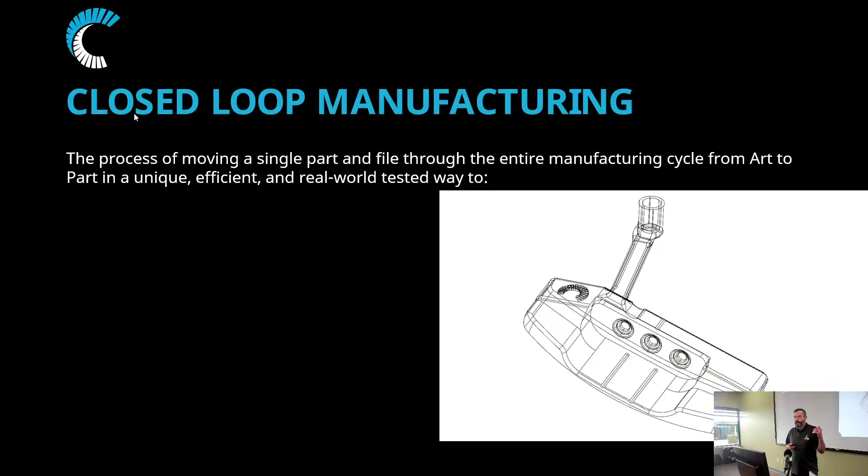If you guys were here last year, we introduced this new project, and it's actually on the table over here. We wanted to take a look at all the products we represent and take a single part file and move it through art to part, right? The whole design to manufacturing phase. So we picked a putter head.

We had an older putter. We reverse engineered it with VeriSurf. We scanned it in. Then we actually 3D printed the head of the putter in stainless with desktop metal. And it's such a unique shape that, instead of kind of creating your own work holding on a CNC machine, we decided to print it in, I believe it was carbon PEEK.

That frees up a CNC machine. That material has just about the same tensile strength as aluminum. It's holding the part well. It's not marring it. It allowed us to do all our operations and finish that part. They were minimal, with some engraving. We milled the face of the putter and we kind of cleaned up the bottom. But it just kind of shows, it gives you an idea of how 3D printing and additive can kind of help your shops.

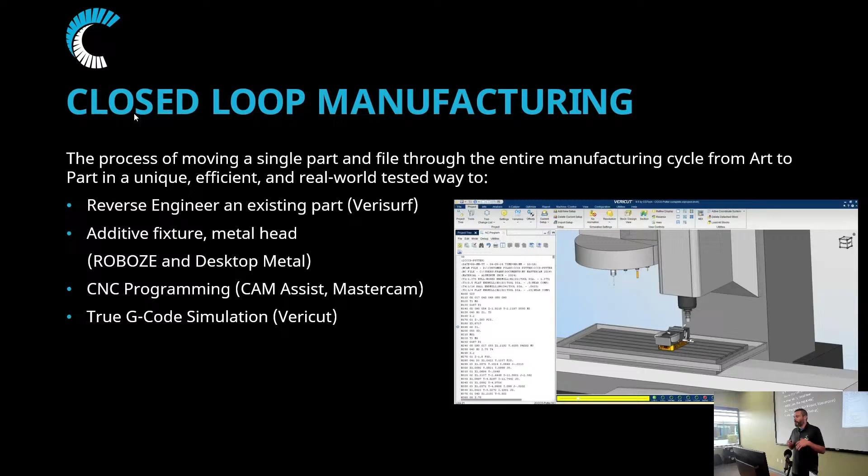So for the programming, we can rough the part out with CAM Assist, finish the programming with Mastercam. Then we want to make sure it runs correctly on the machine with simulation. That's where Vericut comes in. Before, during, and after the machining, we have probing routines to make sure that the part's located. We're inspecting it during and after. And then, of course, we're going to scan it in with VeriSurf and make sure that it's exactly what we wanted.

So the final thing, which is my favorite, is you got to take it out on the golf course, see how it does. Did not make me a better golfer. Not much does. I'm terrible. So we used it. It worked out. I loved it. I still stink at golf.

Moving on to WESTEC that's coming up. They moved this from Long Beach to Anaheim this year, and they moved it a month earlier. So it's October 7, 8, 9. This is my pitch to everyone to go to the show. We have a big booth right up front, number 1201.

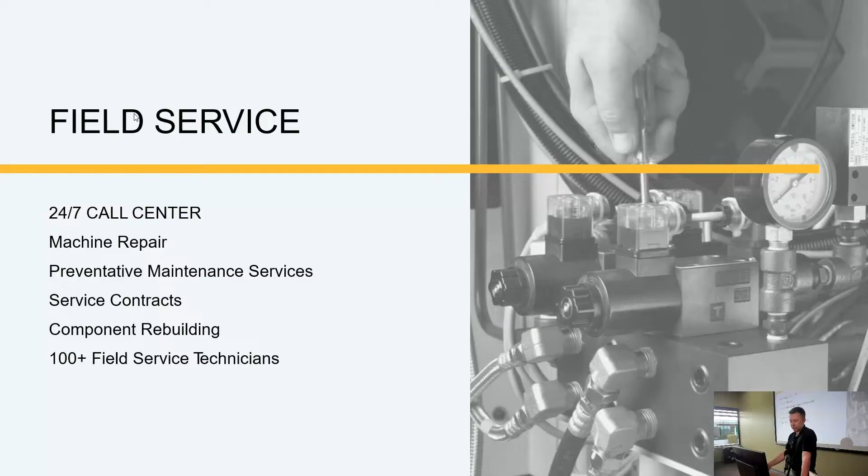We do process engineering, turnkeys, and contract engineering, so if you guys need help programming or with your process development, we do that as well. We have a very strong service group available with a 24/7 call center for technical support. We also offer equipment financing.

So again, 100-year-old company, we've got a large operating footprint, we've been around a long time and we'll be here for a long time. We've got strong relationships with the brands we represent in all facets of supporting the equipment. You're welcome to follow us on social media.

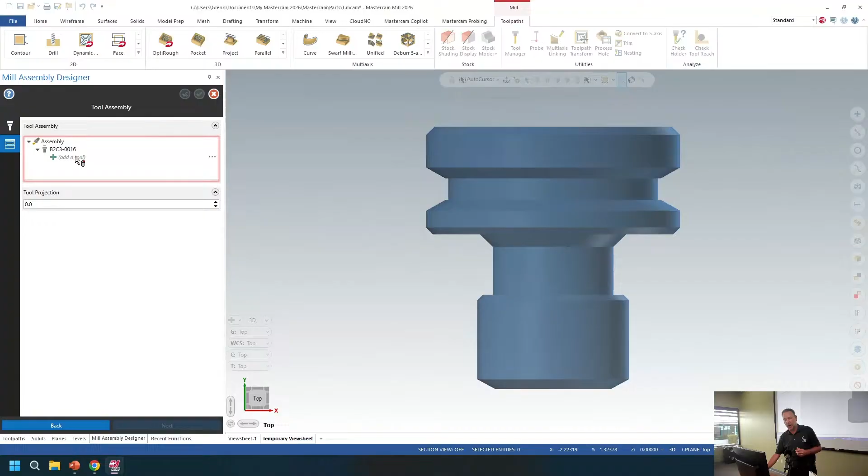Now, when you add a tool, I'll just grab one of mine. Okay, whoops, wrong size tool, don't do that. Good news is I can delete and add a new one. Let's see.

Close enough. Okay, the good news is that within this assembly, I still have full control over tool edits, holder edits. A lot of people think that once I have this assembly built, it's done. I have to do a new one if I want to make edits, and that is absolutely not the case.

In this tool assembly tree, I can right-click and edit just the tool individually. So what they've changed and made better, kind of like the machine group properties, is you can work with the different tree style buttons here.

Tool number, what type of tool, of course all your logistic stuff, cutting diameter, flute length, tip treatment, which again is basically what type of tool it is, and of course your speeds and feeds, all the other savable items, coolant, etc.

You can use your next button to toggle through these items. Hit OK, hit OK. I have this all set and ready to go.

Once you have taken those, and just to kind of speed the process up, I'll add a couple that I have previously messed with here.

Then if you'd like to save these items to a library, it's no different than it's always been. I can right-click and just save them to library and you're done.

Okay, so I really like this because, again, with less mouse clicks, number one, in the classroom, I have to teach you less things. Okay, we get through the day faster.

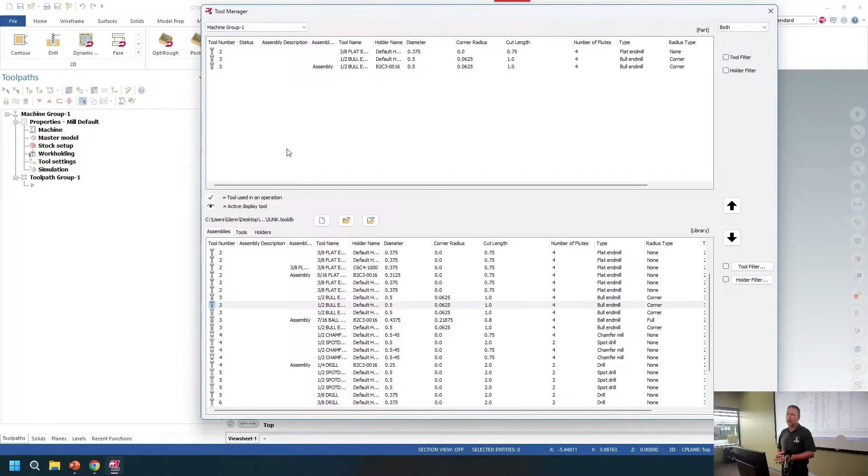But I also have the root menus that I've always had. If you're used to using the tool managers, great, because this is still the same old manager it's always been, but with user-friendly items inside of it to kind of help work things along and get your assemblies saved.

And don't forget, guys, if you have assemblies and tool libraries from older versions, they're very easily updatable. That's one of the things that I think a lot of people don't realize, is that a few mouse clicks and your assemblies are moved into the new software.

So you don't have to start over. If you ever have questions on how to do that, you can reach out to myself or one of the other tech support staff. We can get that done for you.

Lastly, and this is a quick one, but you may have noticed in Mastercam 2026, this little guy right here. And I cannot tell you, one of those things when we at CAD-CAM first got the preview versions of Mastercam, we looked at that and went, okay, it's the same thing, just not down here anymore.

Use the hell out of this, gang. This is one of those things to where basically anything having to do with planes, 2D, 3D, is right here in front of you. And I got to tell you, especially as I'm getting older, now I'm using reader glasses, which I hate to admit, having something right in my face is a nice thing to have.

Okay, so you can access your planes right through here. You can change your graphics view, your coordinate system, construction tool planes. You can even switch between 2 and 3D.

And the other thing that's cool is you can even create a plane from right here too. You don't even have to dive into the manager to do any of that. So that's one of those things, again, just kind of a small, minute change, but it's less mouse clicks and it's right in your face.

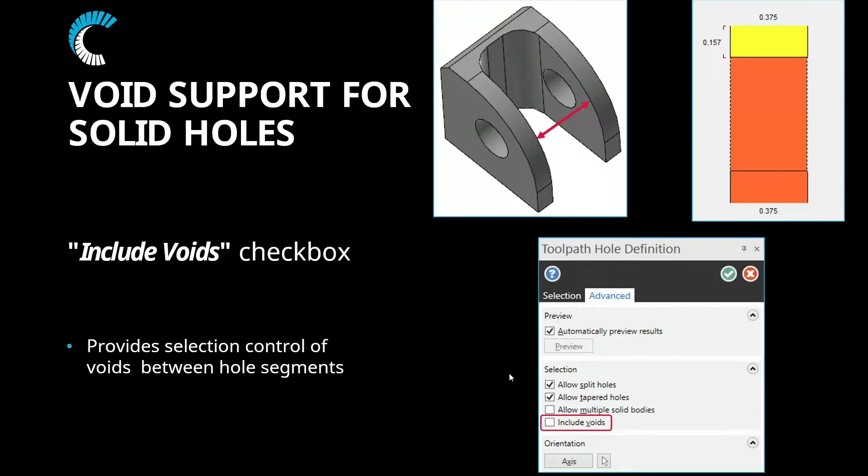So I'm going to show that here, and then I will also in the same file show this priority safety motion, which is cool. So let me go over to Mastercam here and see if I can find my files.

Let's see here. I need Sean's reading glasses. I guess we're all getting old, huh? This one.

All right, so like I mentioned, in Mastercam 2025 and previous versions, whenever you had a hole like this on the same plane, then you would get one toolpath and you wouldn't have the ability to chamfer both sides. So I'll show that here a little bit, and let me move the prompt out of the way here, hide that.

So I have, this is your selection, your geometry selection or your solid hole selection in Mastercam. Everybody should be familiar with that. In the advanced tab now, under the 5-axis drilling, I'll show that too, you have this include void option. So that is unchecked. This is basically how Mastercam used to be. So I'm going to show you.

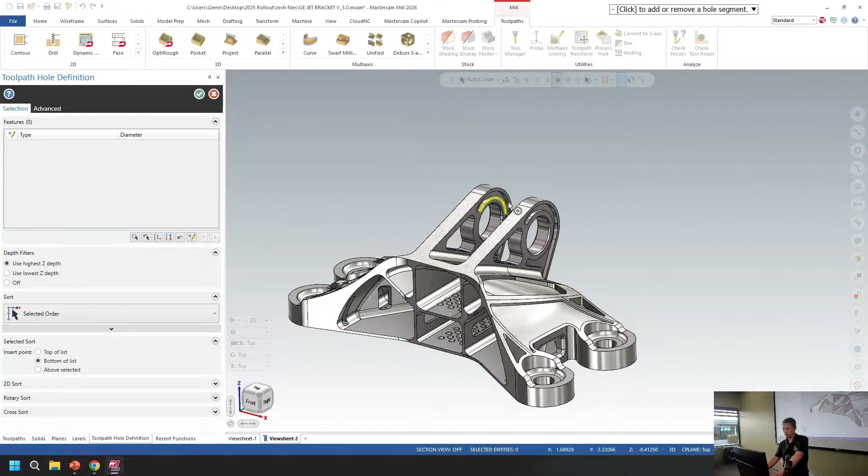And you would come in and select, for instance, let me delete this here and go in and select here. So you can see it's automatically grabbing this other hole and reading it. So if I click over here, I cannot get a separate arrow on the solid hole. I'm limited. I would have to create another toolpath to spot drill that, to chamfer that, etc.

So now in Mastercam 2026, this is off by default, the include voids. So when I come over to selection, now when I click on the solid hole, I can also select the other one over here, make sure my arrows are going in the correct direction, green check, and I'm going to jump into the parameters here, guys.

So you need to be on 5-axis output for your tool axis control, and set the other parameters, a safety zone, all that good stuff. We'll take a look here just for time's sake. I'm going to green check. And you can see now we can do it in one toolpath, whereas before this would have had to be two separate toolpaths, okay?

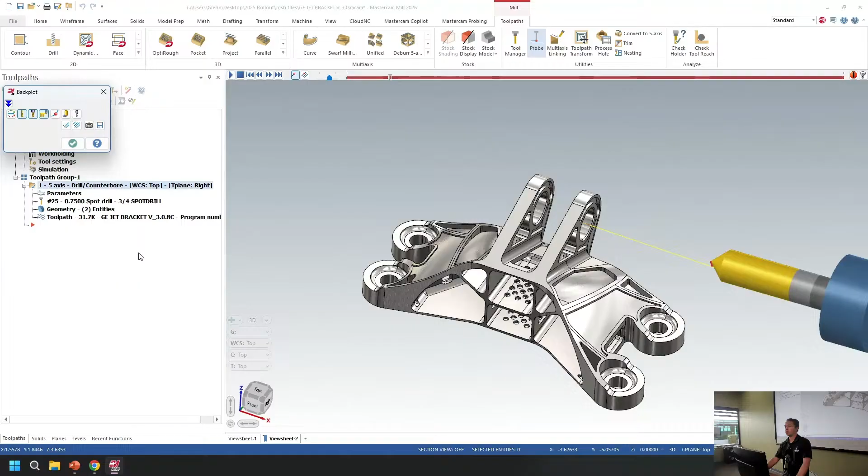So just a nice little enhancement there in Mastercam. Hopefully it makes your life easier, right? That's the goal. One little step at a time over a lot of toolpaths, a lot of years. It's big improvements, right? So that's one really cool thing. Again, that's off by default, okay?

So that is in the geometry selection under the advanced tab. If you're used to the way 25 worked and you need that hole to go all the way through, then you can go back to that. But now you have this option, which is really cool and helpful for operations like this. All right, and then I'm also going to show in the same file here, under safety zone.

So again, we're still in 5-axis mode for output. Under our safety zone here, they added a priority motion option for your retract length. So you have 3 new options now.

You have minimized length, which is shortest distance. Then you have minimize angle, which is basically try and get it in the least amount of motion on the axes, on the rotaries, that you can minimize.

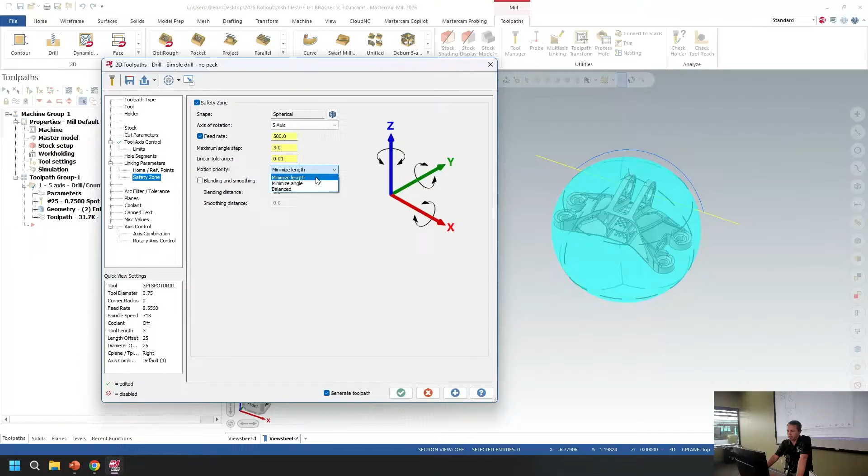So I'm going to show this here. If I do minimize length, you'll see here that I'm going to get motion like this. So I'm going to green check here. And I have basically the shortest distance, if you would.

If I go in and select minimize angle, it gives me the shortest, least amount of rotary motion needed. It's trying to limit that and be direct. You also have balanced, which tries to do a combination of both, so you can select one or the other, and balanced tries to balance both as best it can.

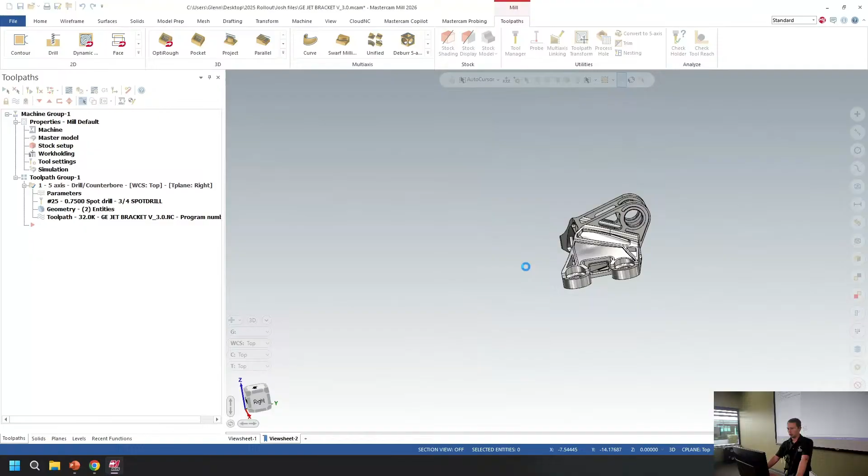In this case we can try it, I think it's not going to do much besides one of them. Yeah, so it's just picking the minimum angle, I believe.

Minimize angle, yeah. So if you have a motion you're trying to go around on your clearance for multi-axis, like drilling or different things, it could be helpful if you don't want your rotaries spinning around a lot. Maybe you have the option to minimize angle or minimize distance. Think of it like an aircraft flying around - if you fly to Asia, you fly over Alaska, shortest distance kind of thing. It's that same concept.

I know this part kind of shows it with the sphere nicely, I believe. It's not overly complex. You can see, like I mentioned, I'd like to think of it like a plane flight - you're flying across the globe, shortest distance, etc. Minimize angle, minimize length, right? So those are some neat new enhancements.

I'm going to jump back into the PowerPoint here, and they also included a new thing: critical depths in OptiRough. Let me jump into Mastercam to show this. Let me pull up a file here. See how fast this computer is, huh? Yeah, we're going to metric units. Cool.

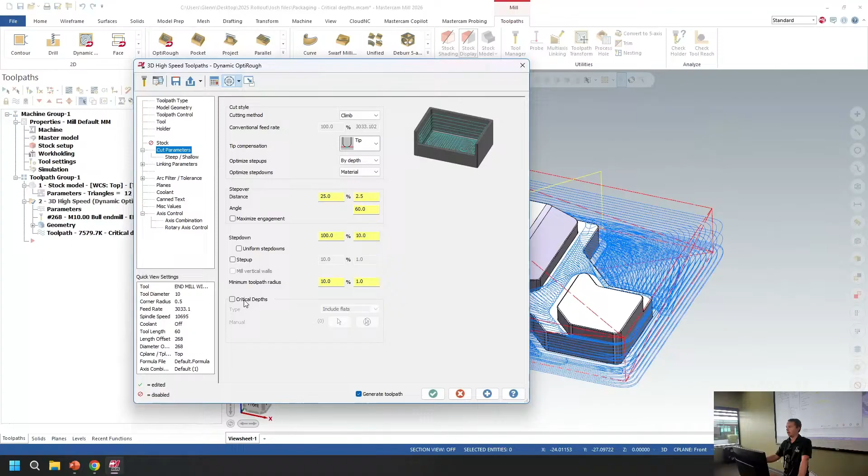In OptiRough, under our cut parameters, we have a new critical depths option in Mastercam 2026. Keep in mind this is for step downs - we still have the ability to do step ups, nothing has changed, we've added functionality. Mastercam's added functionality, which is cool. In a case like this, you have a feature with flats here, and you could use step ups, that'd be one way of doing it. But if you're stepping down like this, maybe you want it to grab some of these floors.

And get some critical depths. So you can do it two ways now. The critical depths here - you can include flats, so it'll automatically detect them and pick them up, which is really cool. Or you can select them manually, so if you really want to force a depth cut to this level, it's really cool. Now you can force it to that depth and it'll go around and machine everything at that depth, which again, maybe you only need it for certain applications, but it's more power, more functionality, and makes you a better programmer in that instance that you need it.

So if I hit include flats right here, I'm going to show you what it does. You could see when I tipped it to the front view, it wasn't getting the bottom floors, and we'll regenerate this here. This could be helpful too if you're close, say cutting 100% of your tool diameter, 150% of your tool diameter, and you're really close to that floor - maybe you want to grab that critical depth, or maybe it's a little bit above or something. It's just really helpful to grab it with the critical depths.

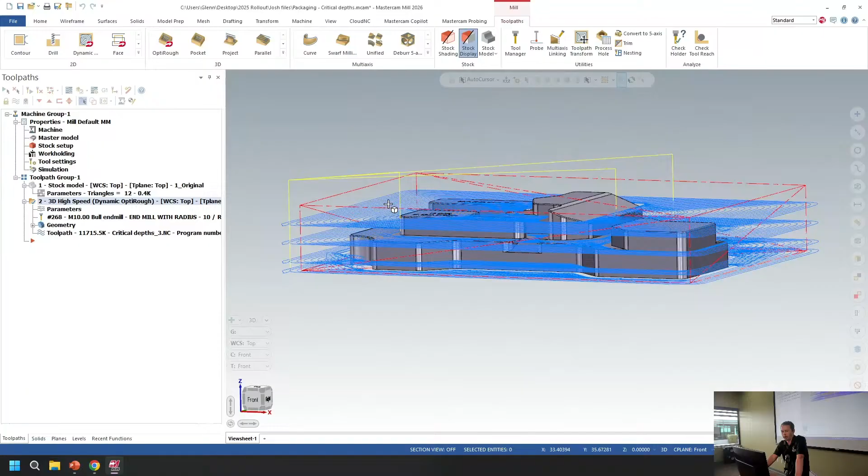And the last thing I'm going to show here is in Contour. Let me go to - I'm in the wrong plane, hang on one second. I'm in the wrong, let me flip this to top here. Isometric. So I go back to Contour here.

I'm going to grab a feature here just to show this. You're probably familiar with it from other toolpaths - you have dynamic motion with color selection for chaining geometry. They just added this in the Contour toolpath, and I believe a few others as well. It was already in the dynamic toolpaths, and I believe Peel Mill and those too. So they just added it in Contour - it's a nice little addition.

It's helpful because now you can see, okay, my chained geometry is green. You can change these colors if the color is hard for you to see. But it's just easier to see now - green chain, avoidance model, etc. In Contour it's pretty straightforward since we're not doing a lot of avoidance stuff, but in dynamic, I'm sure you've all used it and it's been pretty helpful. Just a nice little additional enhancement there.

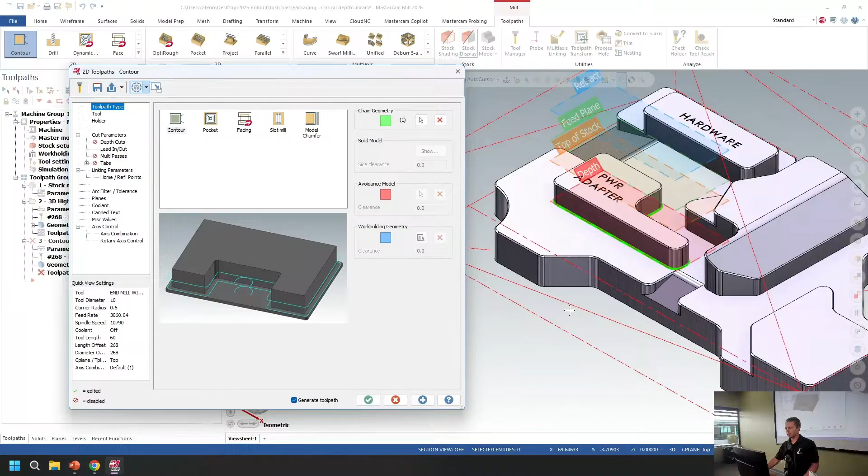All right, oops, got the wrong thing. Did I go back to PowerPoint? There we go.

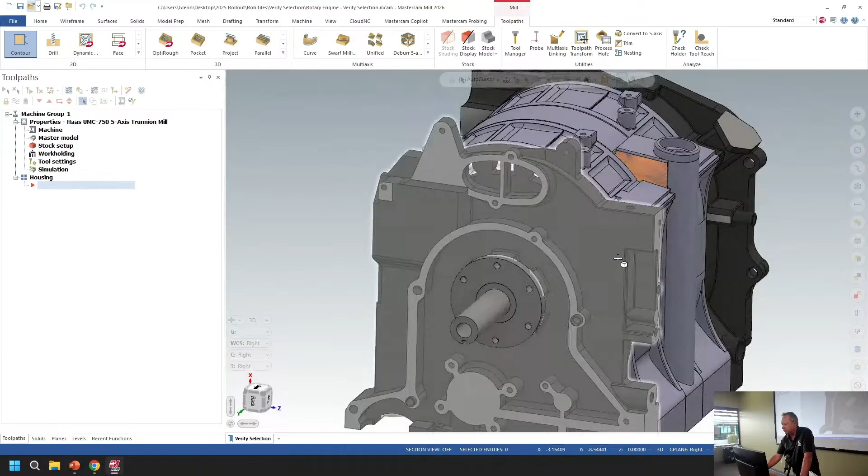This one is just a nice, clean enhancement that helps you guys with some really busy models. As you know, trying to select something that is deep down and buried inside of a model - you start clicking your mouse all over, hoping you can click on it, and you don't even know what level things are on. So let me show you this nice clean one.

Notice when I hover my mouse over the part, it'll give me a number - like there's one of 7 features. So what I can do now is not move my mouse, let that hit, and when I right click, I can see, if I'm going to grab this surface here, and hide it, I can grab that surface. So that's another thing that'll make your life a little easier. Depending on the view you're in, it'll find that number, and it's just a right click to bring up what level it's on, so you can easily select that and move on your way.

So let's go back. Let's go back in the PowerPoint. Yeah, so the tapered helix.

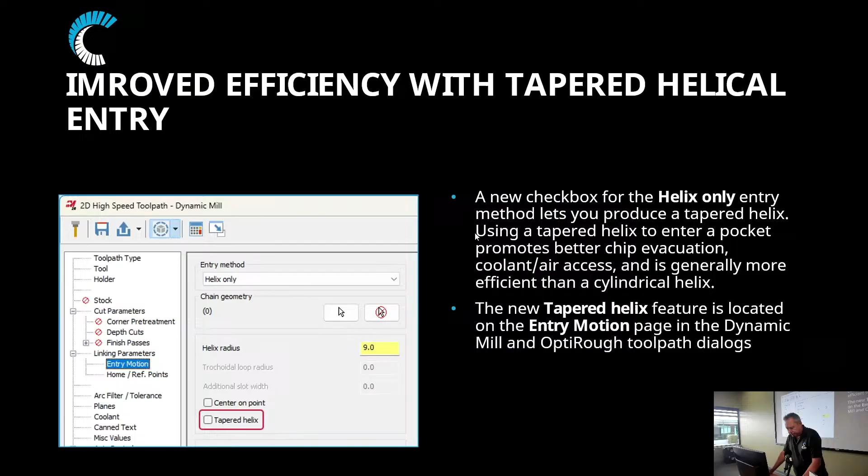You might look at something like this and say, well that's cool, but it's kind of just a switch, right? Why do we have this switch? Well, let's go back to when we started with dynamic milling - it was all thought about based on the tool, giving you guys control of the cutting tool with the step overs and the whole motion. I'm assuming all of you are now using dynamic. So with that in mind, we decided we need to control the tool actually getting into the material, and how those chips are going to come out. Something as simple as throwing a switch with tapered helix is going to be a huge advancement for you guys.

Let's see, tapered helix - let's just grab a part, switching back. Okay, so let's take a look at this entry, and we'll run it in Verify. So this is the standard, typical - let's do some clipping. Oops.

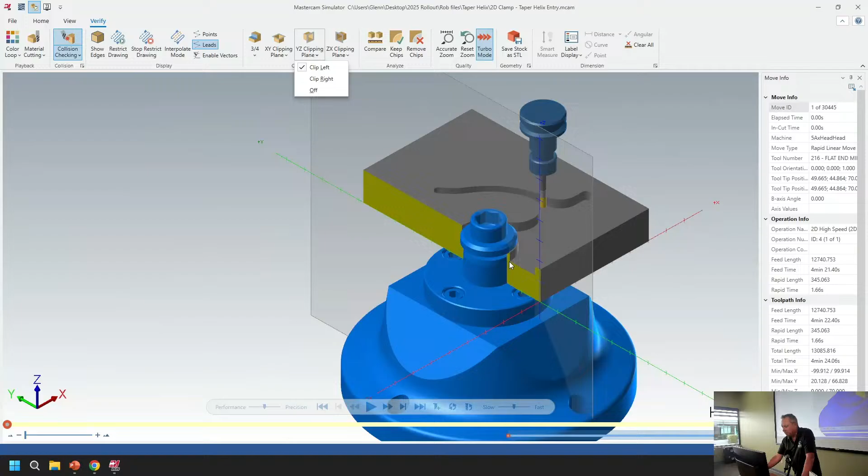No, hold on. I got my clipping off. There we go. So let's just kind of clip this and step it through. So this is what you guys are used to using. Obviously, the tool will come in as a helix motion. And if we kind of bring this in here, you can see once that tool gets down to full depth, then it's going to start cutting. And as we're doing this, we're just pushing these chips around inside that hole. There's nothing to get those chips out of the hole, unless you're on a horizontal, right?

So just a nice little switch here, come into the toolpath, and in the entry, just turn on tapered helix, and that's all I have to do, okay? So what it'll do is take that motion, you can kind of see it right there, it takes 95% of the tool diameter for the top part of the helix down to 25% of the tool diameter at the bottom part of the helix, okay?

Now keep that in mind too, we're going to tighten up that helix going down. So you might need to slow your feed rates just in case, right? Because it's going to start moving that machine. But let's take a look at the verification on this. You can see just this quick little enhancement. Again, you don't have to do anything but turn it on.

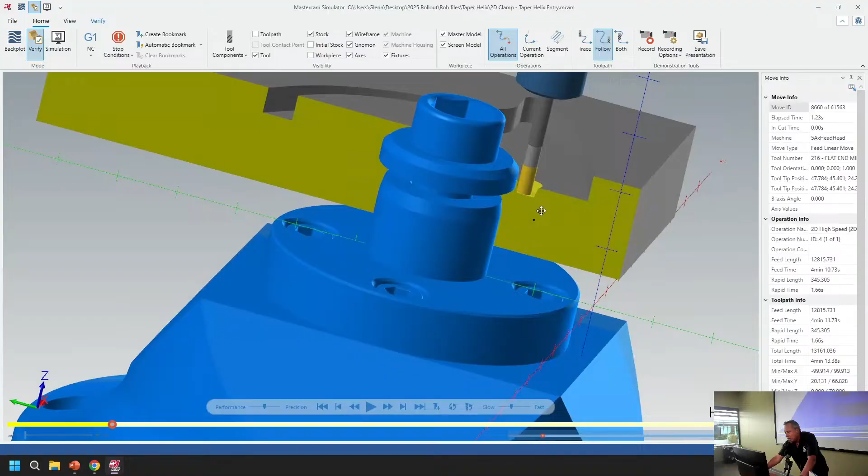Let's get it down in there. And let's pause that and grab this. All right. So you can see now as it tapers down and as the tool starts to actually cut that material, and here we go. Each depth cut, as it starts going, you can see it cuts here, gives a chance for the chips to get out. Make another cut, more release of the chips. And again, respecting the tool, just considering the life of the tool is really what this is doing.

So, and again, just something simple. This is why we have these enhancements, because you guys have been requesting them.

3D deburr. How many are you deburring your parts using Mastercam? Okay, just a handful. Take a look at the 3D deburr. You know, every part has to be deburred, and it's probably one of the most unsafe toolpaths or processes that you have to do for the finished part. You're literally scraping material away, and you know the problems. So we introduced 3D deburr in 25, and we also introduced the ability to use tapered tools.

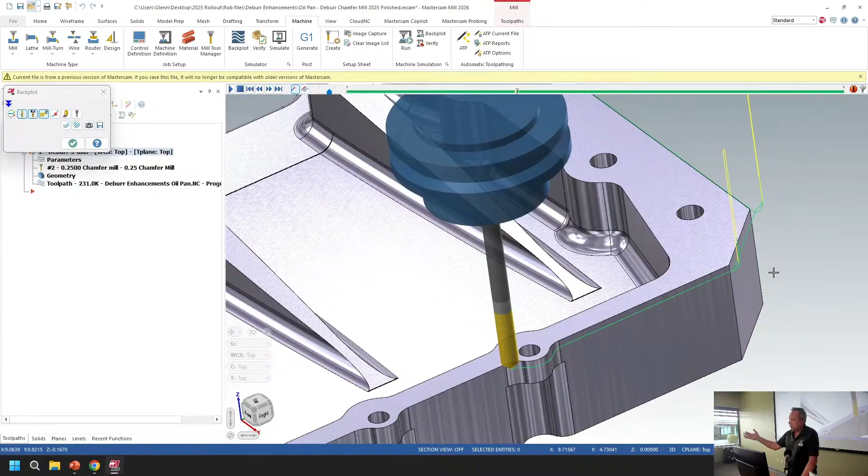So again, we allowed for chamfer tools, and this is a 25 file, and we'll just kind of get right in here. You can see as this transitions from this sharp corner to this sharp corner, it's pulling up and coming back in. Now at the end of the day, all of that's going to deburr, so it's not missing anything. It's just that irritating retract move.

And in 26, all you got to do is regenerate. So in 26, when you're actually doing the toolpath, it'll just be natural. But if you're bringing in a legacy file, then all I have to do now, and you just saw, is just regenerate the toolpath, and the tool stays down. It acknowledges those corners, okay? So it's an enhancement you don't have to do anything with, right? Just do it. All right.

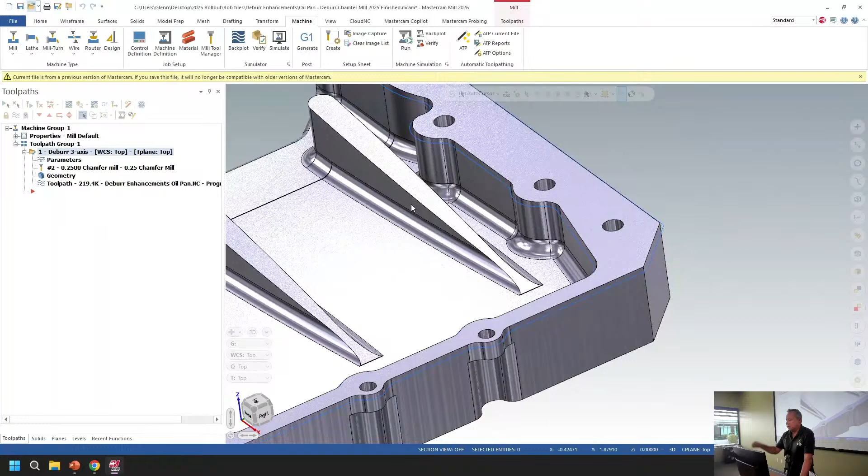One other feature that we added with deburring was with undercuts, with lollipop cutters. In some cases, it didn't cut all of the holes in the undercuts with the lollipops. It got a little busy when the undercuts got past like 45 degrees, it just kind of kept pulling up inside this hole, and it just didn't lay down, right?

And again, you had to do a lot of trickery to get that to work, and there were a lot of ways you could get around it, but we just put in this switch to allow asymmetric edge shape. That's all it is, just a switch. Now it's off by default, okay? And the reason for that is you have legacy files. We want to read those legacy files in, and then you can come back in and throw the switch, regen, you're done. Save it as a 26 file. But just keep in mind, it is off by default.

And all I do is turn it on, and then it respects. We'll have to regenerate here. Okay, so it will again respect that whole undercut and cut those edges.

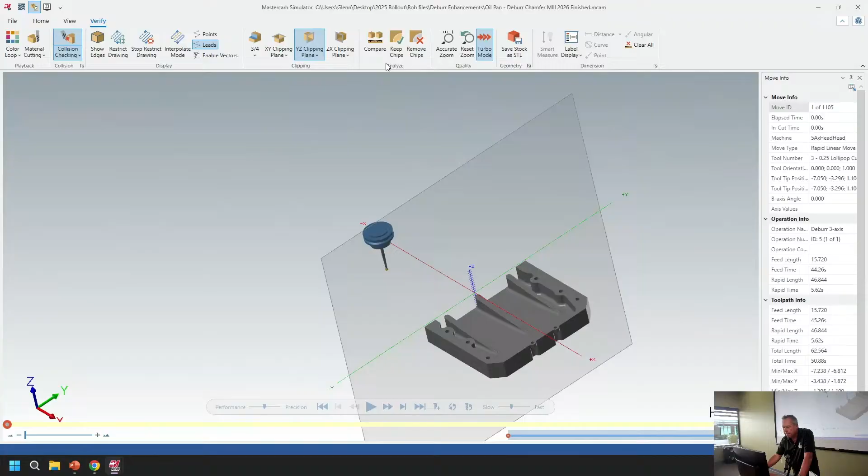So we get it, this guy in here. And let's, you know what, let's go in here. And you can kind of see through it. So you can see that this is kind of where the issue was, in that cross section right in there. And just by throwing that switch, it takes care of it. Again, keeps the tool down and gives you a nice cleaner path.

How are you driving that? Is it surface or edge? You're grabbing the edges. So in the 3D deburr, just grab the whole part. Your machining geometry is the whole part, because you want a gouge check against that.

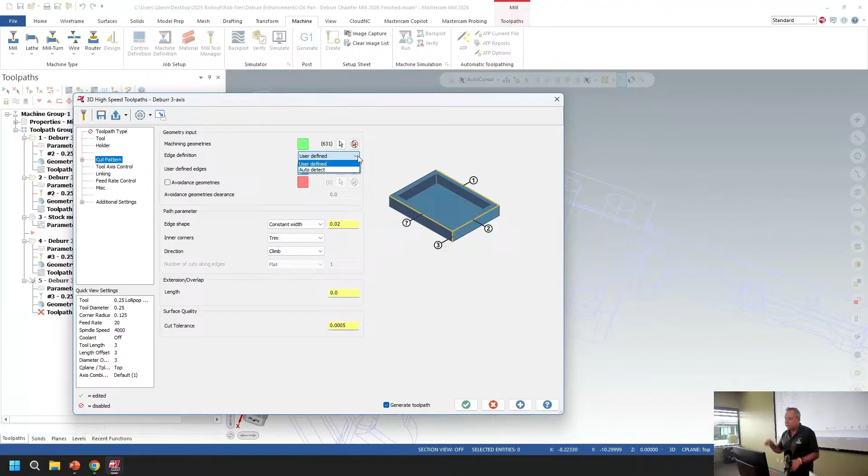Then you have the option of, if I grab the whole part, I could do the auto detect and it would look for every sharp edge. May not want to do that, not in this case. So with the user defined, I can come in here and just pick, and it's just picking those edges, as you can see right there. Right? And that's all I do. Just pick the edges that I want to work with and throw on the asymmetric.

And again, you may want to turn it off in some scenarios too, right? So again, off by default. Very simple toolpath to use, very safe toolpath. Complete gouge checking. And strongly encourage, because again, got to deburr your parts.

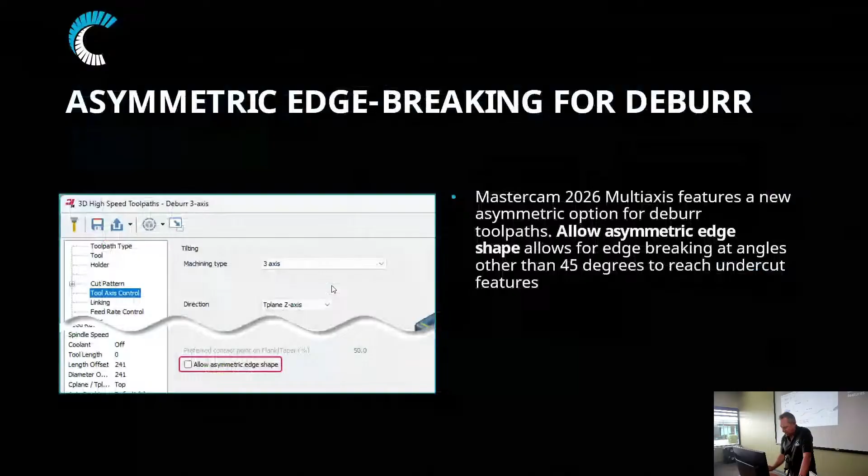All right, so last on the list here. Like I said, we added to the mill turn product the wireframe toolpaths. Does anybody even know what the wireframe toolpaths are? And Jay, I already know you know. Okay, and Derek back there. It's funny, this was before we could cut any kind of surface in Mastercam. So I'm just talking about 2026. I'm taking you to 1990 now.

Okay, we're going back in time, because those are how we cut 3D shapes. Same principle as creating surfaces. As a matter of fact, these toolpaths came out before we could even create a surface in Mastercam. And here we are. Version 3, yeah, version 3, version 4 for sure.

And again, this is going to be in the mill turn product. So we'll open up mill turn. Then I know I have a few mill turn customers in here. So if you'd like to go back 35 years, almost 40 years in time, here we go.

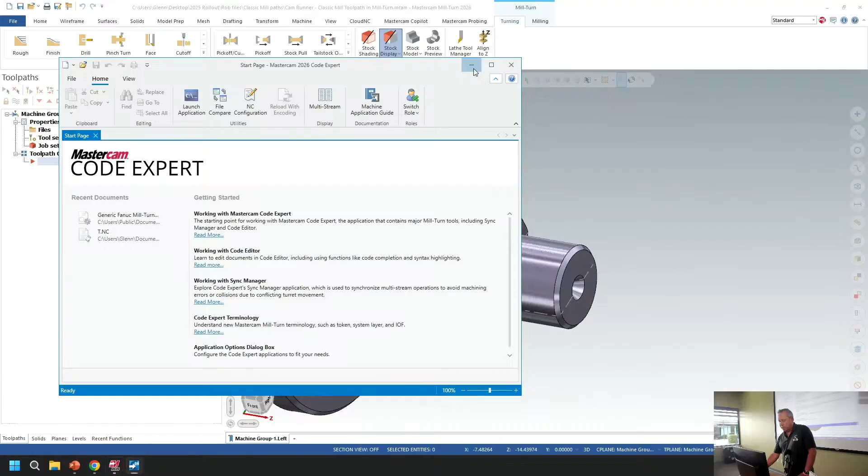So milling toolpath, here they are. You got your wireframe toolpaths now. Again, they picked the old guy, but they forgot that I got a bad memory. So let me see if I can remember my way through this.

Swept 3D. Again, it's going to ask me how many contours I have. I have one. I'm going to take this guy, and I'm going to sweep it along that guy. And here's our tool, the old parameter page, again, kind of trying to trigger the memory here.

The setup, any of you mill turn people, you're familiar with this. So you got to set up your setup here, but then you're probably not obviously familiar with this page. And this is where you literally tell it, you know, this is my step over, this is my across. We'll make this pretty, I can zigzag one way or do circular, stock to leave.

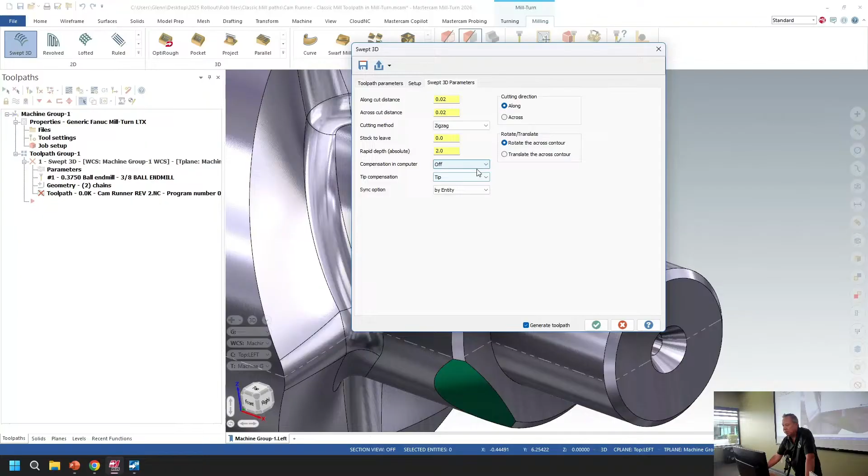You know, I'm thinking 2 inches. I'm not going to cutter comp this. And I think we got it, let's see if we got it. So we're going to take this tool and we're literally going to just follow that contour across. And let's...

See how it works here. I'm going to take it into the mill turn simulation, and this ended up, actually I was laughing about it, but this ended up to be one of my favorite enhancements. It's just simple code. Okay.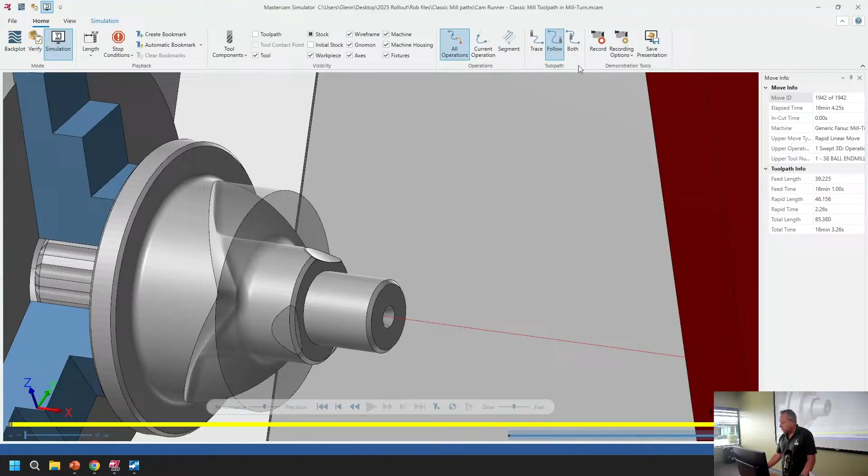Alrighty, I think that's it for me. You have one question on the stream. Oh, I have a question.

The question is about deburring the outer edge, and someone was asking if you can still use chamfer operations for that, like the contour chamfer. We didn't take anything away from you. The deburr toolpath is just another toolpath in your arsenal to deburr a part. But if you're looking at the outer edge with contour, you still have that control. We could still go in here and switch this to 2D chamfer. The downside is that you don't have the gouge checking that you'd have with the solid modeling and 3D deburr toolpath.

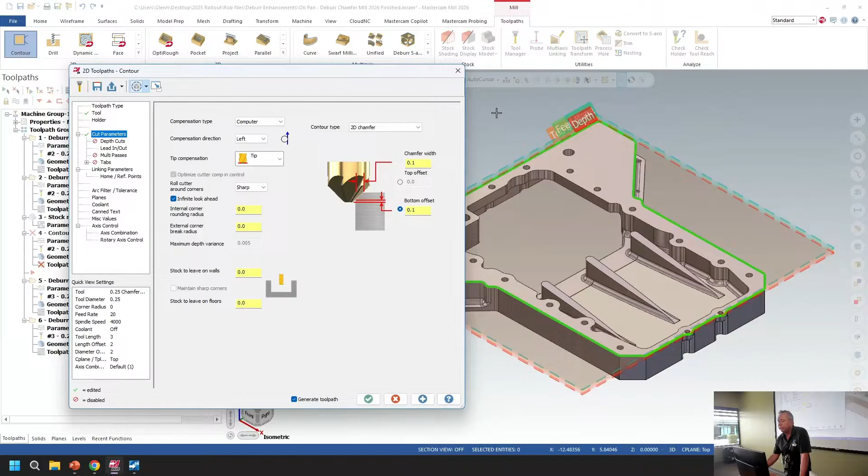Let's take this further. If you already have multi-axis, then you have the deburr toolpath in multi-axis, and you also get the 3D one without needing to purchase 3D separately. The advantage is it's less code. The multi-axis toolpath is vector-based code, while the 3D deburr toolpath will be less code, with smoother arcs and lines. It also works with mill level customers—you don't have to have mill 3D. And let's not forget our router people, they have it as well. So that toolpath lives in here, called deburr 3-axis.

I hope that answered the question. I think we went the right direction with that. Any other questions online? Well then, let me get out of here before I make a big fool of myself. Or bigger fool. Okay, awesome. Frank.

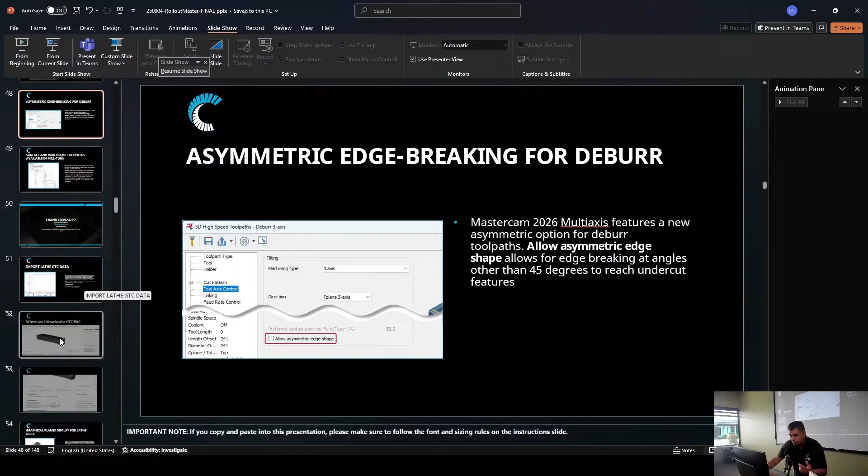There were a few things missing here. I don't know why they're down here, but I did want to show this. So where can you download a GTC file? Like the file I'm using, I downloaded it from Sandvik. I know there are a few other websites like Tools United, Kennametal. This is the specific tool I'll be showing.

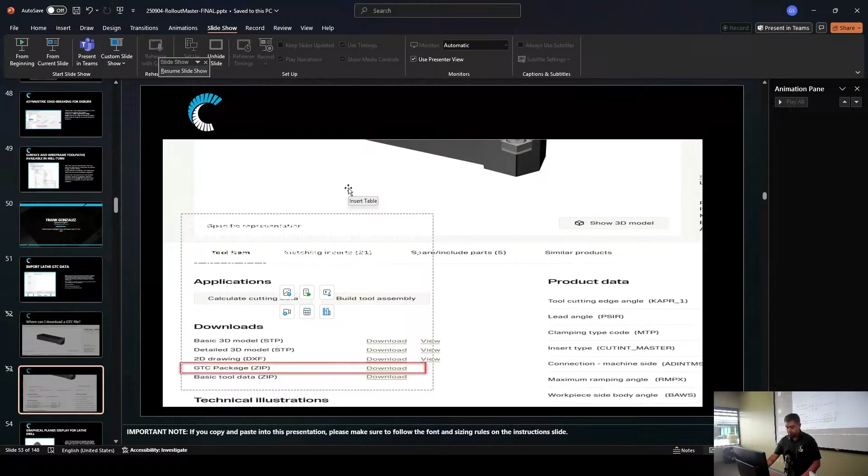It doesn't show it for whatever reason—it's not showing a diagram, I think it's like that. But anyways, you can see here, when you scroll down, once you select your tool, you have the option to download a DXF or STEP file. You'll see this option on the vendor's website for the GTC package, okay. Let me get out of this.

Now to show you how that works, let me open up a file here. Okay, so I'm in lathe—again this would work whether being in lathe or mill turn. So to import a tool, you'll come into your lathe tool manager here.

You're going to right-click in this white field up at the top, scroll down to the bottom where it says Import Export Tools, then Import Tool Data From, and now you'll see this option for the GTC, Generic Tool Catalog. We're going to click on this. This will open up a window, and now I'm going to open and go into the files that I downloaded—I downloaded a couple. Let me see.

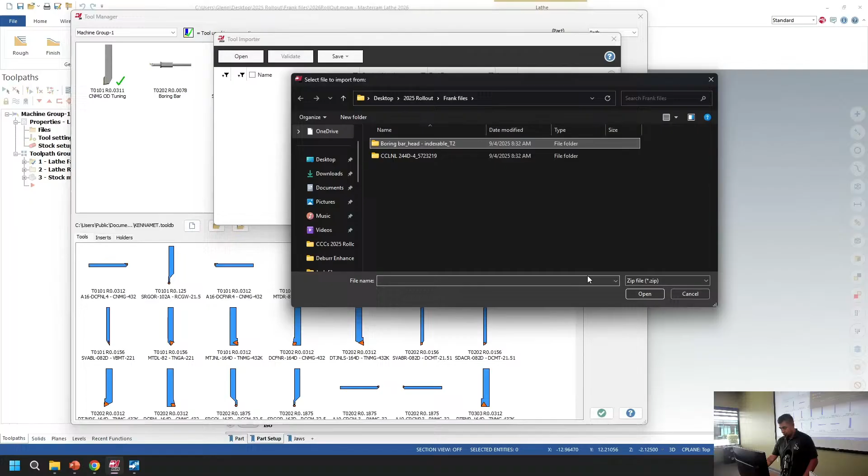It looked like that worked. Looked like it unzipped it. Where's John? We need some tech support. Alright, so that's a zip file. Yeah, but I don't know if it'll work if it got unzipped and then zipped back up. So it needed to be zipped? It needed to be, oh, zipped. Okay, I think I have a copy. Alright, hang on one sec.

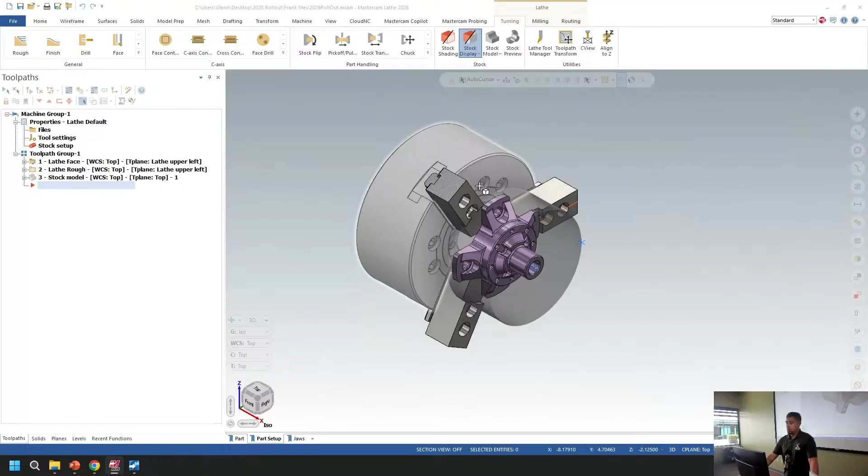Okay, let me give it one more try, see if that works. So import, export, import tool data, generic tool, and then if I click on open and I select this... it's thinking, there we go. Okay, so this window will open up.

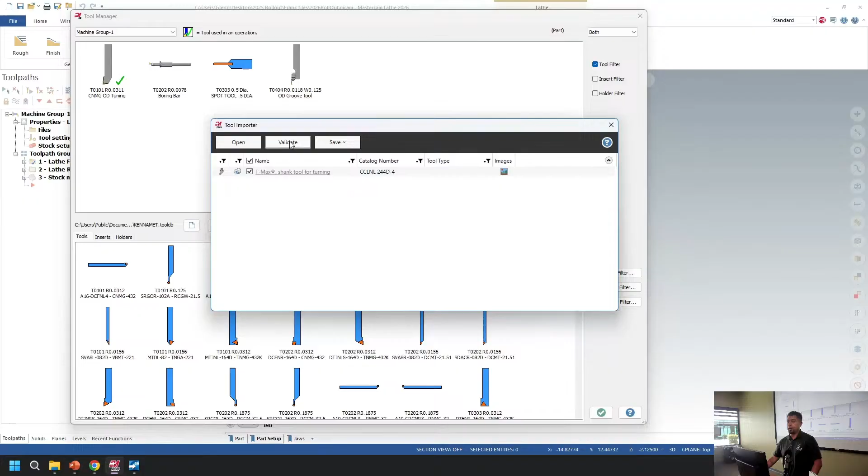Okay, so now to do the whole process, I was gonna use this tool. You go ahead and select it. The next thing would be you validate it. So validating is just Mastercam doing the work in the background of what you would normally do, like selecting your holder, your insert, defining the quadrant where it's gonna be cutting, etc. And then you'll see a green check mark here. That means it's ready to go.

So once it's ready to go, you have the option here to save, and you could either save it to your existing part file, which is where we're at, or you could save it to a library. So I'm gonna select part file, and you'll see it updates up in the back. I was playing around with this, and you'll notice that the image it's showing is because I have something in the background. If I was starting with a new file and there's nothing back there, all you would see is the actual tool itself.

But now if I come in here and double click, you'll see the tool properly defined, and you might have to go in there and change certain things, but all the tool data that came from the website is all integrated in here. So again, this takes the fun out of design, like picking your holder, insert, everything—it just does it in a few clicks.

Any questions on that? So you have to have it unzipped. Yeah, it has to be unzipped. And normally, I'm sorry, zipped. It'll come zipped. Yeah, it has to be zipped. So directly, exactly how you extract it from the tool vendor's website, that's how you take it in.

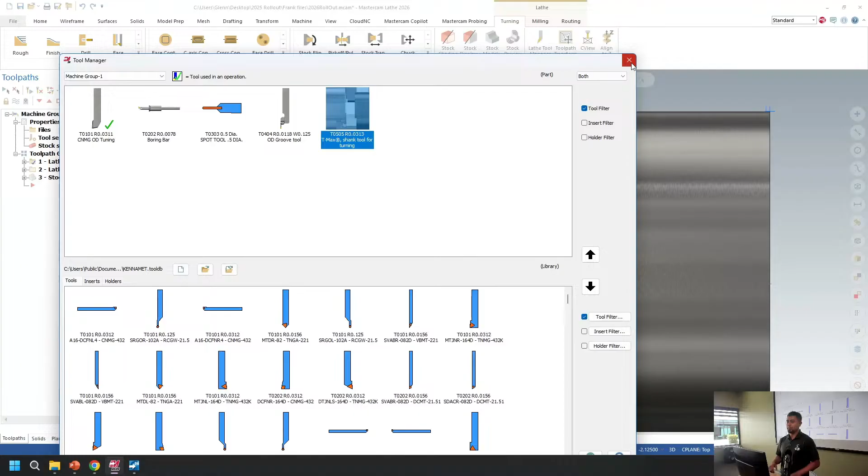Awesome, okay. So now the next thing will be the graphical planes, right? In Lathe.

Let me activate this. So now in turning, when you're doing a drill operation, we'll select our tool, and once you're in the parameters, you'll see this plane display option. You could turn this on and off. So if you don't like it for whatever reason, you don't have to be using it.

You could turn it on, turn it off, and select what you want to see. So in this case, if I want to see my depth graphical plane here, I could just grab it and drag it to my final depth. I could activate my clearance, my retract, and just move those along wherever need be.

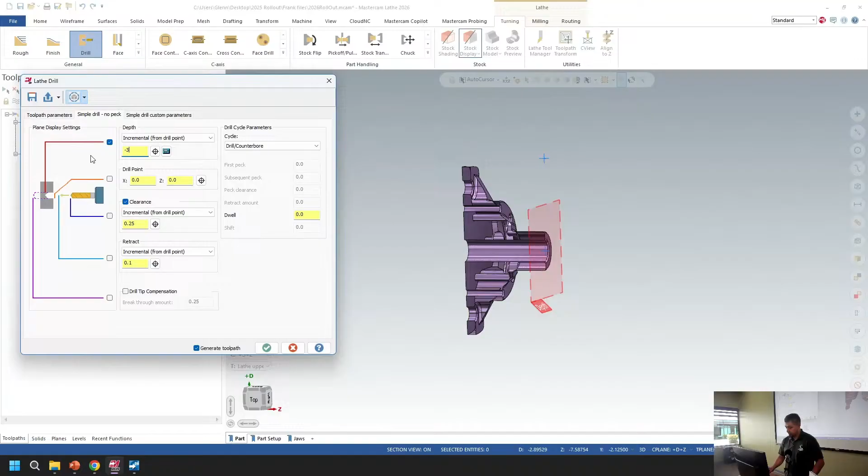And go back in here, and you'll see that this also works, by turning them back on. You could turn on and off the labels here. So if you type in a value, it's also associated to it. So again, something simple, but it makes a difference, at least for you to go in there and be able to just go to this depth and not there. So anyways, in a nutshell, that's pretty much it. Those are a couple of enhancements. I don't know if you guys have any questions.

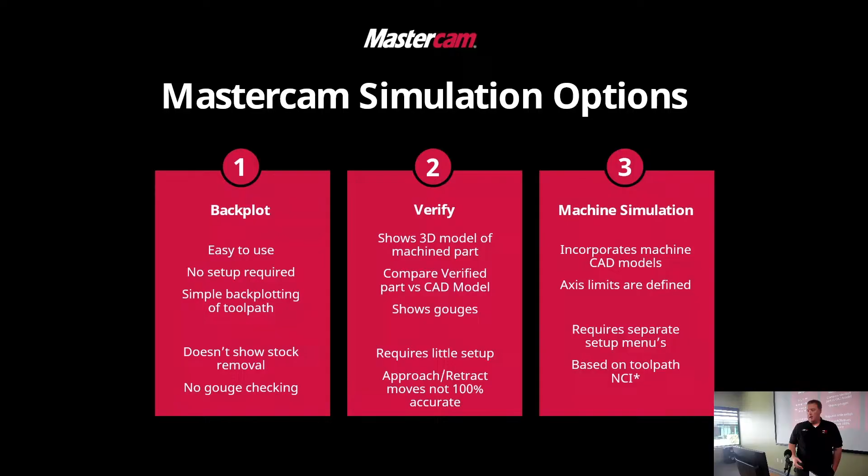As far as the machine simulation, and that's where we can actually bring in the machine models. You can occasionally tie it to the post processor, get a better accurate representation of what that is, because now we're going to be defining axis limits. We again bring in the CAD models of the actual CNC machine, but again, it's still based on the NCI and the post processor.

Some of the... I'm missing a couple slides, but that's okay. Oh, interesting. Oh, it's hidden, let me unhide that slide.

So again, that's going to be on the Mastercam side. On the CIMCO side, we also have something similar, called CIMCO Verify. The CIMCO Verify is going to be directly loaded up in Mastercam. I would say it's comparable or equivalent to the Mastercam Verify.

The difference is that we are using the CIMCO technology, or the kernel from the simulation, that they developed in-house from the ground up in CIMCO Edit. The big thing is we leverage the new technology of your graphics card, GPU processing, which is 10 times at least faster than going off your CPU instead.

So to give you an idea, CIMCO Verify is equivalent to Mastercam Verify. They offer machine simulation, so we can tie in the machine models and do accurate collision checking as part of that.

Some of the other options get into true G-code simulation, like CIMCO Editor, which is more of a backplotter specifically for G-code simulation. And then machine simulation within CIMCO Editor, again tying in the machine models, axis limit checking, collision detection, things of that nature.

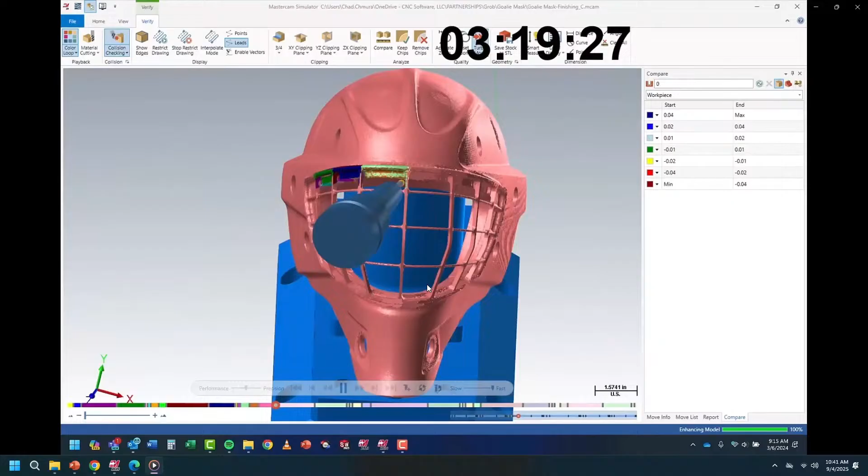As you can see, in about 6 minutes and 48 seconds, we're finally finished with that grouping of toolpaths. Now, I'll speak for myself, but I'm not a guy that can program and get it all right the first shot. I'm usually going in to verify 20, 30, 40 times in order to make revisions, tweak something here and tweak something there, and dial everything in. So, 6 minutes 48 seconds.

If we look at that within the CIMCO Verify side, again leveraging your GPU and processing, so we load everything up, we're going to go ahead and play that through. And what you'll notice is that we're at about 21 seconds in order to do that. So drastic time savings is part of it.

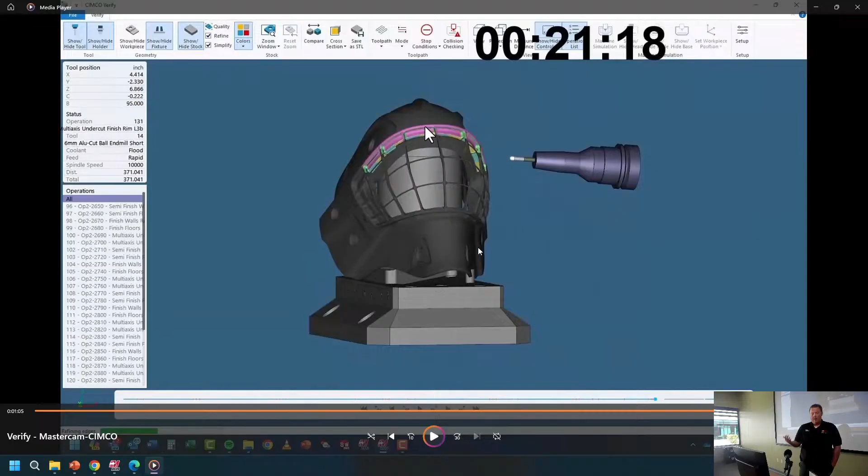Now, if you're going in 20, 30, 40 times, you're not spending all day in verification where you could actually be programming maybe another part, feeding the floor, whatever it may be. So again, talking about what tools can make you a more efficient programmer, this would be one I'd strongly suggest taking a look at.

Any particular questions on the simulation or the Verify that CIMCO has to offer? And even though I'm here with Mastercam, CAD-CAM Consulting is obviously a distributor of CIMCO products.

And that leads into my Mastercam Probing presentation. As I used to work for CIMCO, Mastercam Probing was formerly known as CIMCO Probing, and Mastercam acquired the technology, or that business, in March of this year. Part of that transition is I came over to Mastercam, but I'm still involved with the CIMCO products overall.

So quickly, we'll just go through maybe some of the changes from CIMCO Probing to Mastercam Probing. We'll go over what is probing, why to use it, when can you probe, and then perhaps even go through a little live demonstration as far as what that looks like.

So like I said, CIMCO Probing - has anyone heard of CIMCO Probing in the past? I know there's a couple customers in here, yep. And out of curiosity, for a show of hands, who has probes on their machines? Okay, so a lot more hands, right?

So CIMCO Probing was acquired by Mastercam earlier this year in March. It is being rebranded as Mastercam Probing. One of the biggest differences that is nice about the acquisition is now it's fully within Mastercam, so that means for licensing, but it also means additional development resources.

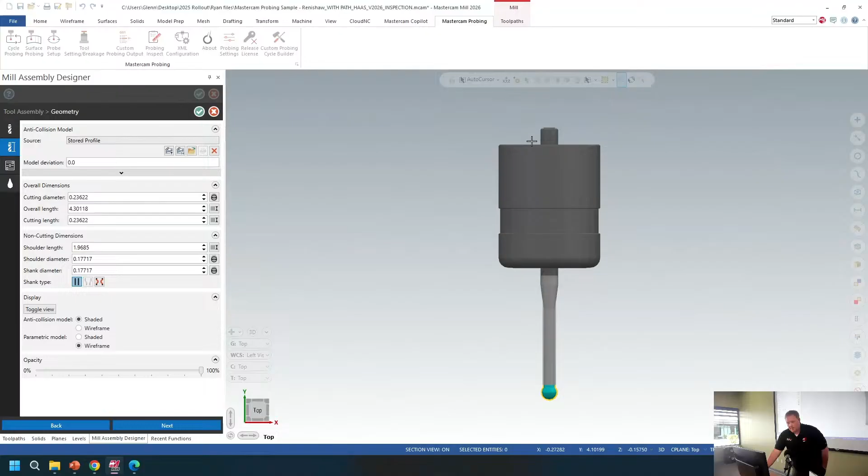And because we're within Mastercam, we're going to want to be associated to geometry, so that if the geometry ever moves, grows, shrinks, anything like that, we're tied to it. We just need to regenerate the operation and we're back off to the races again. Depending on the cycle, we're going to have different geometry selection options.

In this case, maybe I'll say from stock. My stock is set up here, so that's good, we pull what we can off of that. X0, Y0 is where it's at. We have my width and my height, and then it's just up to me to say, okay, this is how deep we want to go, maybe this is how much we want to stand off the surface, and maybe this is my clearance height.

Again, because we're within Mastercam, and for those that recognize these being yellow fields, you can right-click as part of there, and grab geometry or information off of the graphics window itself, getting a live updated feedback as part of it. But in this case, since we are setting a work offset, I could give it a little over-travel distance, tell it my work offset we need to set, and then we're good to go.

From that point, it's now a valid operation. We could run it through graphics if needed. And if we post out, you'll see that we have the easily recognizable Inspection Plus code that you're most likely used to seeing. So probe-on commands are 9832, this is posting out for a FANUC. 9832 probe on, protected safety moves are 9810, 9812 is our width cycle in X, width cycle in Y, up out of the way, turn the probe off at that point, okay? So again, just a simple kind of operation, but everything follows that same workflow.

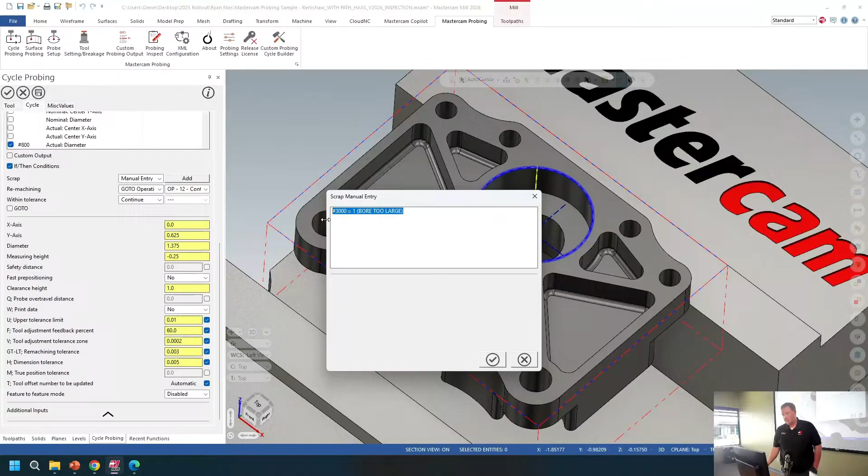If it needs to be remachined, if I needed to babysit it, maybe I do a similar approach and again stop the machine, and you guys can determine what you want to do with it from that point. But otherwise, maybe you want to go back to the operation that we finished that at, and maybe we want to recut that. That's where we could say go to an operation. We'd be able to select that operation out of the list. I can see it was a contour, finish center bore is my operation comment, and now we're going to recut and rerun that particular part.

If we're within tolerance, then we'll continue on like normal. In addition to that, you'd be able to use the Renishaw macros that allow you to do a tool offset update. You can give it a tolerance of when it's going to be met. If it is out of tolerance, it can obviously update the tool. You can tell it a percent of deviation, but maybe not to exceed a value, right? All of those controls are going to be built into the Renishaw macro, and that makes it very easy to put in that data right here into the Mastercam window.

The nice thing is again, if we take those and we post it out, we handle all the formatting for you. So if we actually look at the code this time, there it goes. What you'll notice is that we're automatically putting an insertion label, a sequence number, so that way we can have a point to restart to. Obviously, the first time we're just reading top down, so we just cut the feature.

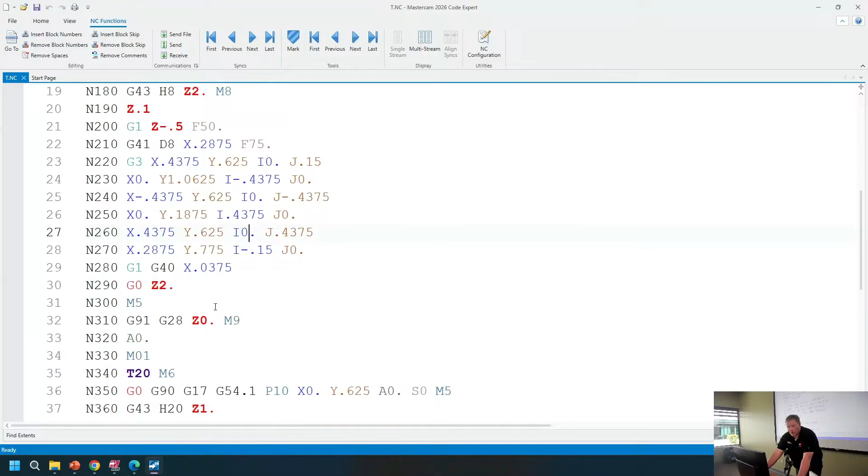We're coming in doing the actual probing itself. You'll notice there's a couple extra inputs here to the macro. Here's where I'm actually copying in that data. So Renishaw is writing into these common variables, and those are being overwritten per probing cycle. So by copying that into a user-defined variable, it's going to stay there so you can reference that data later, use it in the calculation, whatever you may need to do.

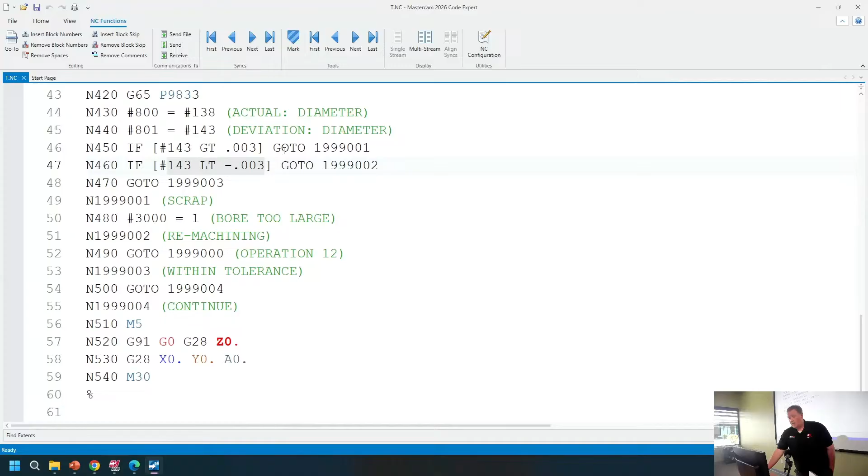But then what you'll notice is we have these if-then conditions. We're referencing the pound 143 variable, which on a FANUC is going to be the deviation based on the diameter of that bore. And so we're saying if that deviation is greater than or less than the tolerance I gave it, now we're sending it to a different label, we're actually scrapping it out. Maybe we need to do the remachine and rerunning and cutting it again. Otherwise, we're within tolerance and continuing on like normal.

So again, that's all going to be output for you with minimal setup within the GUI. The last thing to kind of highlight on the probing is, again, using it post-machining. Again, we can use it to check features, all within the machine without removing it from the fixturing or whatever the work holding may be.

In addition to that, we could obviously create a probing report, and that way you have some type of information to go along with it. So again, you can certainly reference the probing and incorporate it into your program, in a number of different ways and areas to better the workflow.

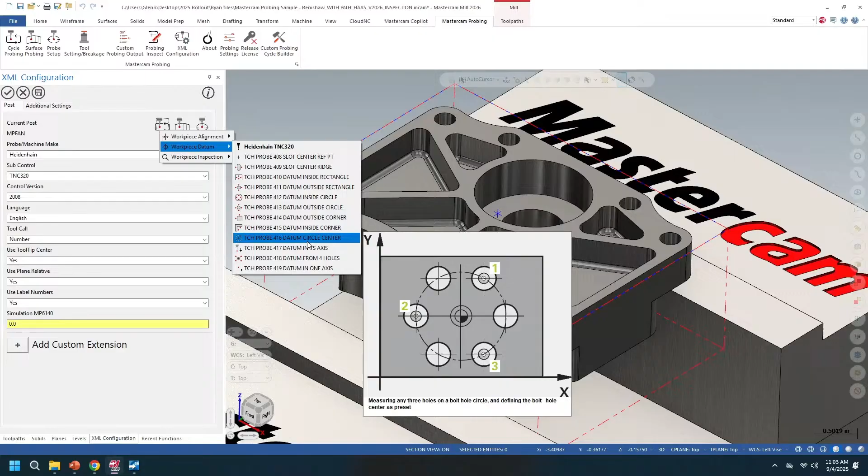Do you support Heidenhain controls? Yeah, so we do support Heidenhain. We do support Siemens. For Siemens and Heidenhain both, we reference their native probing cycles. That's all defined within the post processor, where we'd be able to tell it, okay, this is my Heidenhain, and we can see all their standard probing cycles. If it's a Siemens control, we would define that as well, which then are the standard cycle, and then 9-something would be part of that too.

We do have a number of other native controls. Okuma has their own native probing macros that we do have support for. Makino, I think, does as well. So a number of different ones there.

Any other questions? Yes, sir. One of your CAM competitors offers a best fit solution. Do you offer anything like that in the future?

So we're not doing any best fitting natively connected to the CNC machine as part of it. I guess it would just depend on what you're going after. I have had customers take the data from the machine, bring it back into Mastercam, and align it to those points, but it's not a live connection to the machine to feed back data.

Yes, sir, training. So training-wise, there's a number of different options, whether Mastercam or CAD-CAM consulting. Prior to CNC, I worked for a reseller and had to try to implement some of the other probing solutions before that point. So if you're familiar with your probe and actively using it, you kind of already know that, and you kind of already know Mastercam, right? So now it's just learning a sliver as far as how do we merge the two together. A nice thing too that works well is that even within the cycles, if we look at some of the options here.

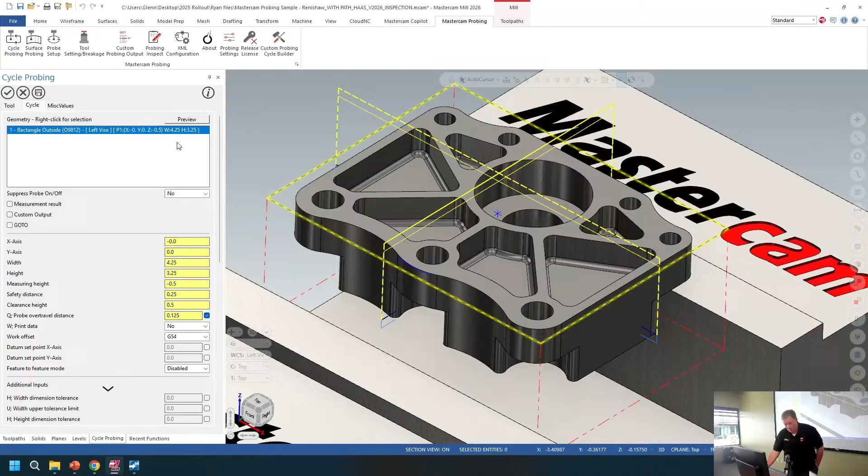You'll see like Q is an over travel distance. If you're maybe looking at your CNC programs that you've written by hand, you can see, okay, Q needs to be 125, right, and you can easily match that over into your Mastercam program. We also have a preview window in order to see what those changes are live as part of that. But yeah, that could either be remote, on-site, or in classroom, a number of different options depending on where each user is at in the process.

But being that we are referencing, in this case, the standard Renishaw macros, one of my biggest things I leverage in my trainings is the Renishaw Inspection Plus manual, just because that's where you can actually see where the variables are being written into, and why we're referencing a pound 143, what is a Q, what is a 9814, and we can make clear understandings as far as what that's doing.

Yes, sir? What is the cost for the add-on for that? So the software itself is a $3,000 add-on, and then it'd be plus maintenance as well.

That includes training for one user? Training is generally separate outside of that, and that's something that Ashley or whoever else could see what would be a good fit for you guys. Does that include the post-processor modification? Yeah, yep.

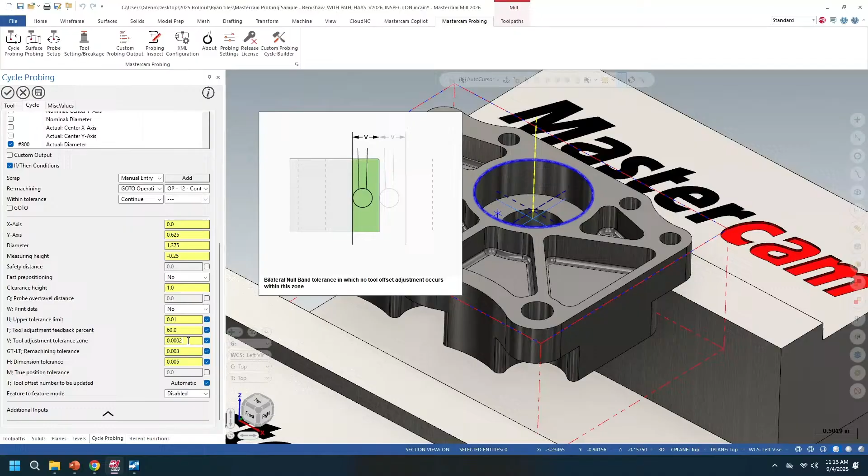And then there's times too, maybe we don't want to update the tool, so that's where your adjustment tolerance zone is. If it's within 2 tenths, I don't necessarily need to chase the tenths on my tool and keep updating part after part. If it's within a couple tenths, subject to the part and materials, then maybe I don't care about updating the tool. I only want to update if it's outside of this area but underneath this area, more or less.

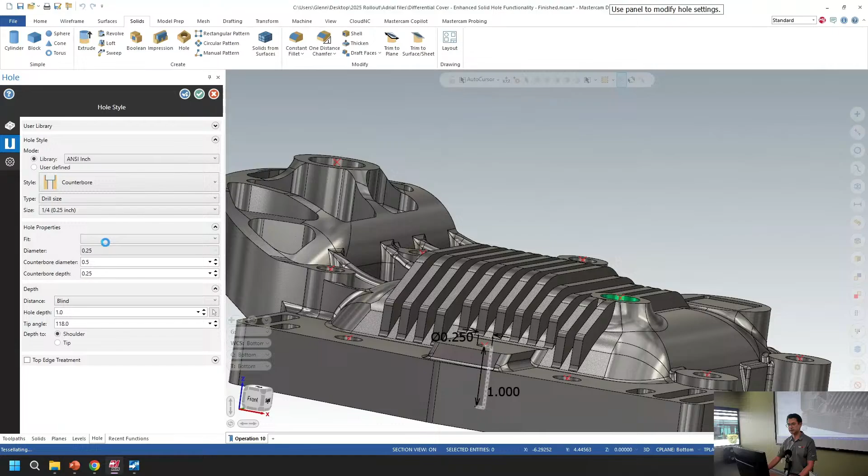With one of the libraries selected, you can select an option, hole style—counterbore, countersink, taper, threaded, and so on. So let's go and select a counterbore hole and take a look at this. You can see how the profile has updated to represent that counterbore hole.

We also have a list of types. Each hole style is going to have its own types that you could toggle between and use, as well as sizes. The main goal when designing this was to reduce the need to jump to tap charts or calculations—we pull everything into Mastercam. You can easily cycle through and select which holes work the best. So the theme is making it easier to use and less back and forth.

As we go through this, we see updates here, but the biggest update as we jump through different hole styles is our hole properties changing down here. We have different fits you could use for this counterbore, which update depending on what's being shown in this view. Then you can see here we have our diameter, counterbore diameter, and some other dimensions, hole properties here. These are set to read only.

You cannot edit these because you are in an industry standard—you don't want to veer off from that. But we do have an option to edit that if you want to base off of it, and I'll show you that in a second.

Looking at the hole depth, we've updated some of this as well, adding the through all function. You can see just by switching that, we were able to switch to through all. Let's go back to blind hole. We also added the depth to the shoulder, so we can add the depth to the shoulder as well as to the tip. Enabling those, you would be able to see your profile outline updating.

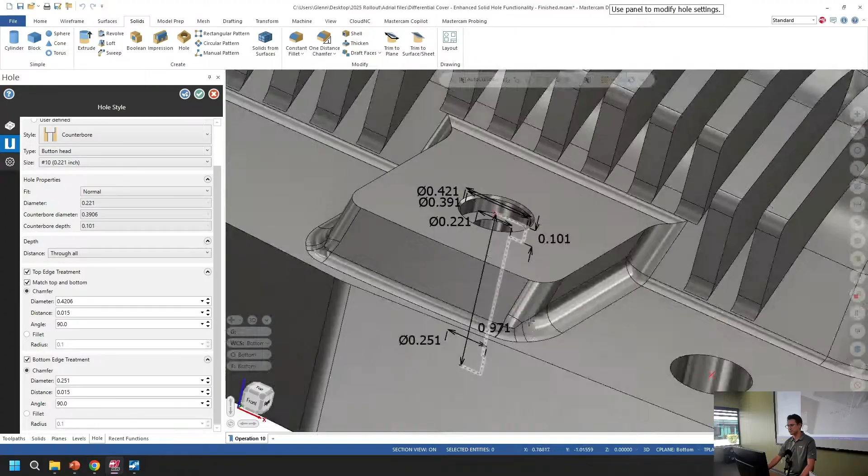Where is it? It's hidden somewhere there. It's okay, but it adds that. So like I said earlier, we can make the edits off of this.

Industry standard. We do have a toggle here that we saw earlier of user defined. By clicking that, a couple things happen: your type is removed as well as your size. That's because you're going to actually edit the dimensions of the hole of the property. So you could come in and click, edit, and change. This is all editable.

Let's say you have a starting point, or you want to use this starting point of this counterbore hole, for example, and you want to make slight adjustments off of that for whatever reason for the particular job. You could do that now.

And let's say you like that hole and you want to save that for future use. So we have our hole libraries up here. If you had a hole library that you've already created, you could click this drop down to view. But let's go ahead and create one now, and we're just going to call it saved for this time being. Let's create that library. Clicking this button here will allow you to create new libraries.

Adding that is simple. Just click this other button down below in our presets. You could rename this, you could select new libraries as well. Clicking that, we'll save that.

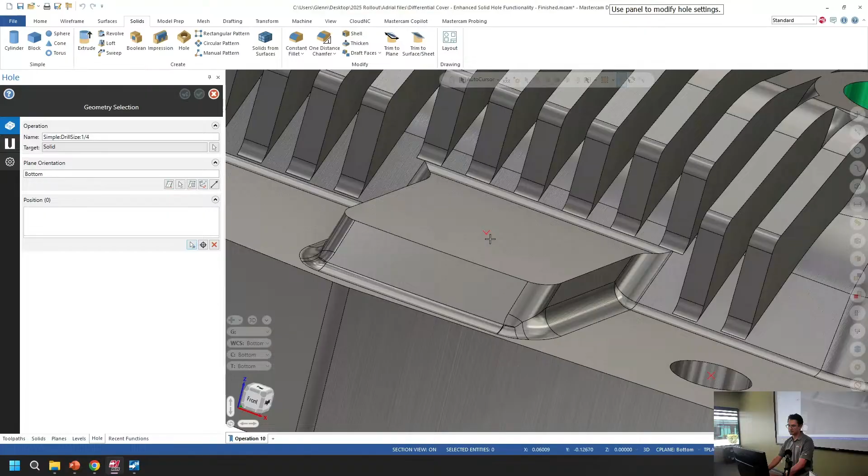Again, because it's a live demo, let me just select that one more time. It always happens, right, with live demo. There we go, let's just use auto cursor. You can see with the auto cursor, we can just place the hole wherever we want.

Having this list shown here, you could build as many libraries as you want, as many hole styles as you want. Also, if you already had your hole styles or libraries from your previous Mastercam, you can import those into the new version and show those there. Or if someone's given you a predefined hole library, you can pull that in as well.

These could be selected and updated and changed when you want. Once that is added and your library is created, you now see we have a separate section down here called User Library that you can click the drop down to view and toggle between and see those holes that you've created.

We've also added a threaded hole. So threaded holes can now be used — this is new for 2026. You do have, again, a lot of types that you can select from, as well as sizes, to build out those holes.

That is the hole style tab, let's jump to the advanced tab. A lot of the same options as last time. We do have the ability to show threaded and non-threaded holes by clicking that and changing your color, same with the hole position associativity. This is your hole graphics, so if you want to turn that off, you can click that, and that will turn off your hole graphics shown there, as well as the sizing of that text.

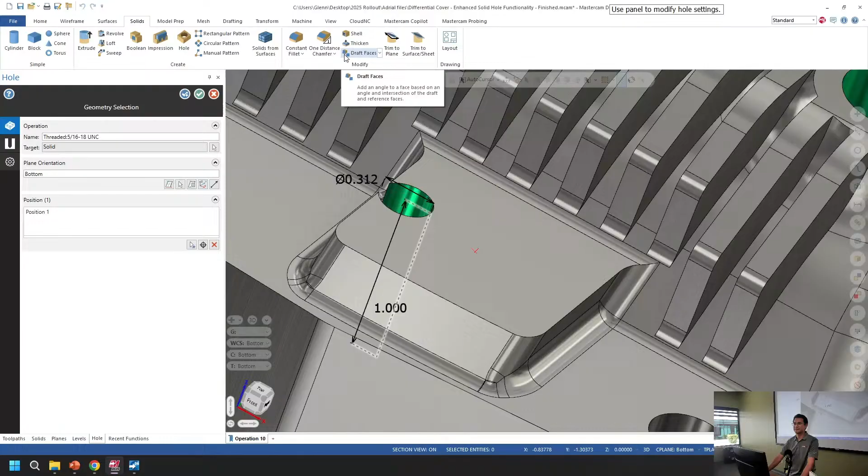Okay, so next we're going to take a look at the levels manager. All these parts here that I'm showing are from our signature parts library. If you want to play around with these parts and see how each one functions, they're all labeled depending on the function, so you can go in and play with that.

So the levels manager is probably the biggest redesign that we've had. Most of you have probably seen it for 2026, but what we've done is we moved to a tree structure. The tree structure allows for grouping, allows you to group your levels and organize your files and your levels here.

With the levels manager, we have our grouping function shown here. All groups are going to be shown with a folder icon. Grouping can be nested as well, so if you wanted to group files even further, let's go and drag that onto that. And now we can see that's nested. Just as easy as it is to nest them, you can easily drag them out.

This level icon here shows that it's a non-active level, and the check mark shows it's an active level, so clicking that will mark the level as active. We do have our level number shown here, level name, our entity count, and our visibility toggle. Clicking that will toggle it on and off.

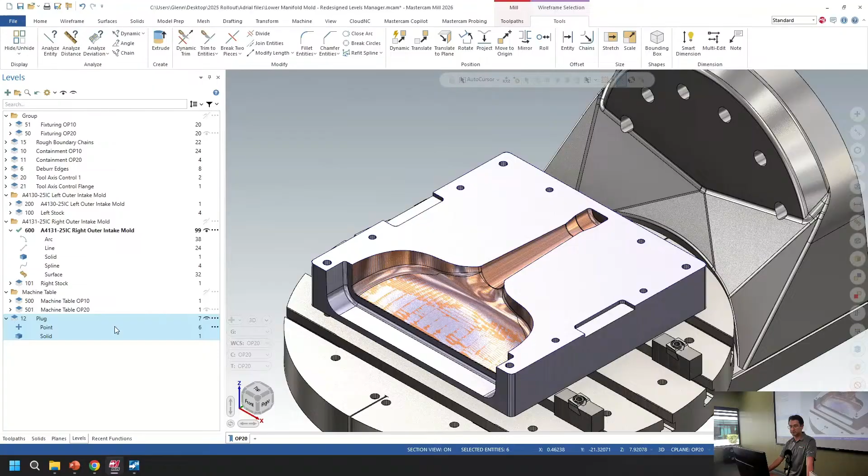Now we do see that when you take action on a level that has the visibility off, it will turn the visibility on because you are acting upon that. But now we have those points shown on this level, and if you want to delete those, you can delete those. You can also copy them too, so if you want to put those on multiple levels, you have the option to do that there.

We also have contrast rows shown up here. And with the new level visibility, we have our toggles. All levels on, all levels off are still up here, we're just using the eyeballs to show that. Toggle all of them on, and clicking that again will reset the level visibility and bring it back.

One other thing you can do is create groups up here. You can create groups, and as I create groups you can just nest to your heart's content. So this allows for easy user organization of your levels. That's the levels manager.

Any questions? Can you still export, import? Yes, you can still export, import. Right here.

Saw some other hands? Is there any enhancements being done, because a lot of projects I work on have 200-300 plus operations, to go select an operation and go directly to the level and geometry associated with that operation? So the question was being able to select an operation and go to that level of geometry. That will probably be another team working on that, but we could talk to that team and see if that's something they're looking into.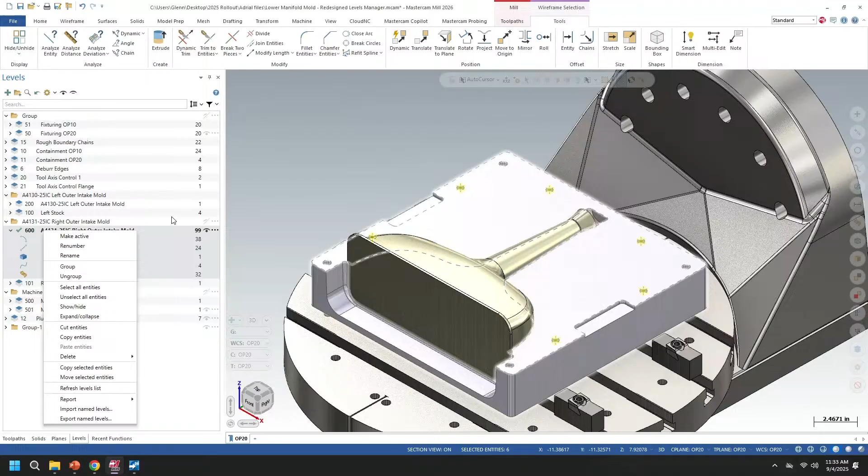Question over here. Yes, two thoughts. One is renaming a level, is it right click or did you use the triple click on it? Yeah, so renaming, it's a slow double click. How many clicks? Two. One, two, found it was three.

Next thought is, I want to make a new level. I don't want, when you go to make a new level and hit the plus, it automatically puts it sequentially to the next level. But I want 500. Got it. So if we want to do 500, we'll double click the level number, then rename it. But because we already had a level, in 25 and earlier you had an option to go in there and put what you want.

So if you go into the graphics area and right click, you have your levels right there, see the level box right there? Now type in the level box, type in 500, colon, test, and enter, and you'll see it show up on the left-hand side. It should have popped in there.

If you put the double... oh, we already have that, let's do a new number. Let's do 600. Then you type the colon, which is a separator, and put 600. Your comment is it automatically creates it, makes it active, and sets it for you. Yeah, there it is.

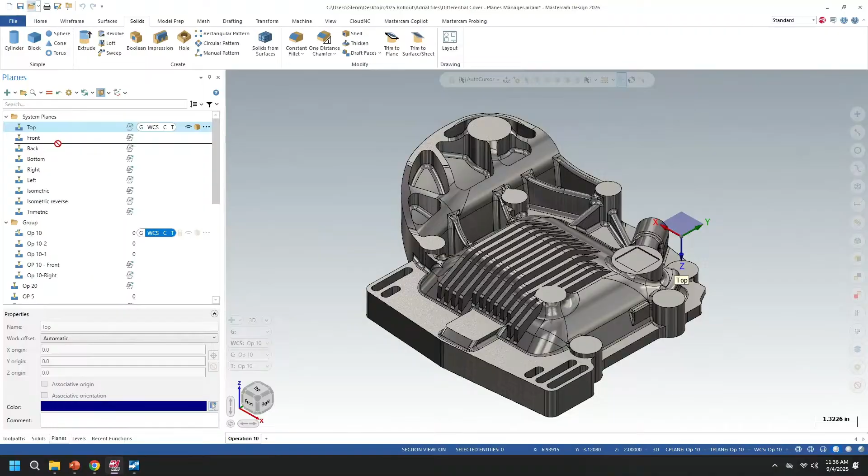You cannot drag them in and out of the group. You can see I'm clicking and holding to drag it out, but you can't bring it in and out. Those are your default planes.

However, all of your other planes that you've created, what we call your named planes, can be moved in and out of the groups. For example, I want to move this out, I could quickly bring that up and move it in there. You can see I cannot bring this into my system planes, I can only move them into my created groups.

Looking at this icon here, we are now showing the type of plane you're using. So if you created a mill turn or a lathe, lathe X, lathe D, that will show here. I don't think we have that in here, but if you came in and created a lathe plane, it will show a lathe icon now, and it'll show either the lathe D, lathe X, so on. We do have the check mark showing that it is a used plane.

And then we have our plane name, your work offset number. This icon here is signifying that it's automatic, an automatic work offset, so that's being set there. Whenever you set a manual work offset, it'll show the number here. We have our coordinate controls, our lock, unlock, display gnomon, section view, as well as options here as well.

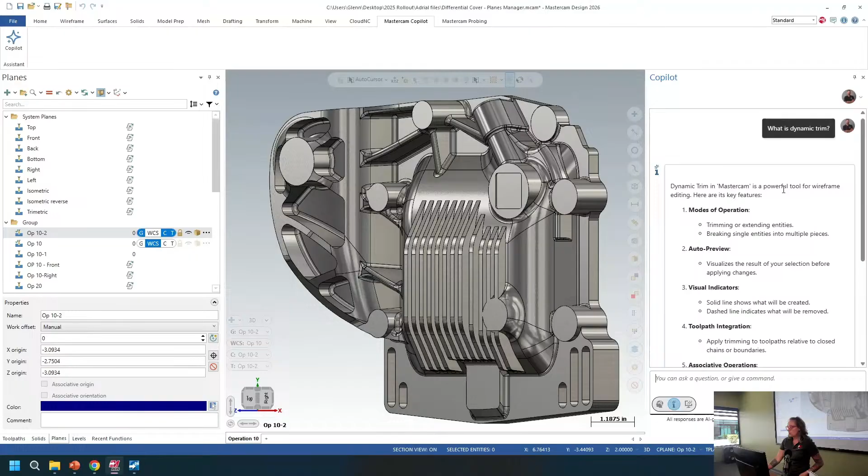I want to know, what is dynamic trim? So you can see right here, it is thinking, and down here it is thinking as well. So it's looking in Mastercam help documentation, and it's going to provide you that information. So it tells you what it is, gives you information directly from our help documentation, and if you want to go deeper into that, it provides you links. If you click on dynamic trim, it is going to open the help documentation so you can dive deeper on your own. But if you don't want to, you can continue to ask it questions.

Let's see now, maybe I want to open a file. So I typed in 'open file.' It is going to open the file manager for me so that I can quickly go and find the part that I want. All right, I want that part. So, typed in open file, opened it immediately for me. Pretty cool.

Now I'm going to move to automatic. Now it's going to start figuring out, do I want information, do I want a command? So that's a little far away. Let's do screen fit. So it's going to pull it up for me. Next up, maybe that's too much. I'm going to say zoom 80. And it's going to push it back for me. So just using this chat command, you can start to interact with Mastercam.

All right, so from here, let's see, maybe I want to open up dynamic contour. So it's thinking, and based on what I gave it, it knows that I want to open up a dynamic contour toolpath. It didn't give me the information about it. If I wanted the information, I should have said something like 'tell me about it' or 'I want to know about this.' But let's just do that really quick. I have that selected.

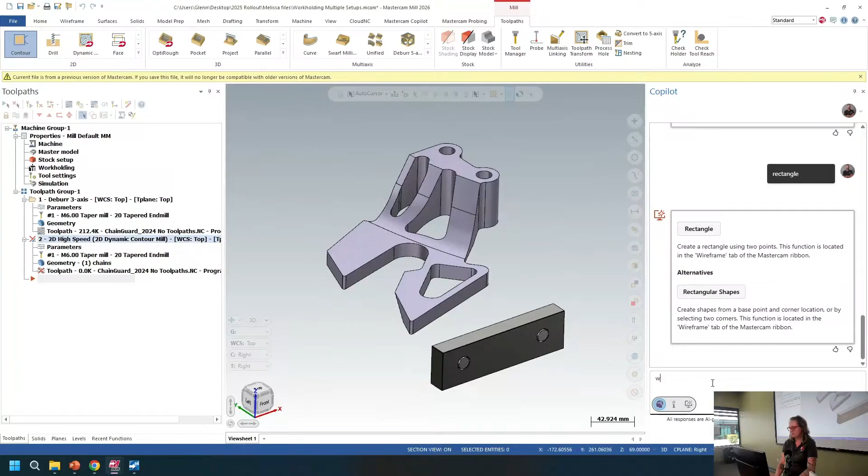So before it gave me the command execution, and now it's thinking, you can see the little dots here. And now it's giving me the information I want instead. It is able to understand the difference between commanding or executing and figuring out what help I want.

There's a few more things to mention. Over here we have the voice chat. I don't want to mess with the stream, so I'm not going to use it right now, but if you click on the voice chat, you can use your voice and say screen fit and then send it, so you don't actually have to type it. That would help a lot with my typos today.

While you're typing in here, type it in, press enter, and it will send it. It is pretty cool. There's one more thing I wanted to show.

While you're in this closed beta, we have these two little buttons here as well, which tell you whether something is helpful or unhelpful. If it's doing it correct and you're happy with it, click the helpful button. It's going to give us feedback knowing we're doing well in that. If it gave you something wrong, click the unhelpful button, and then you're able to provide us feedback so that we can improve the model and make it better and better.

And that is it for me. Let's see. Any questions?

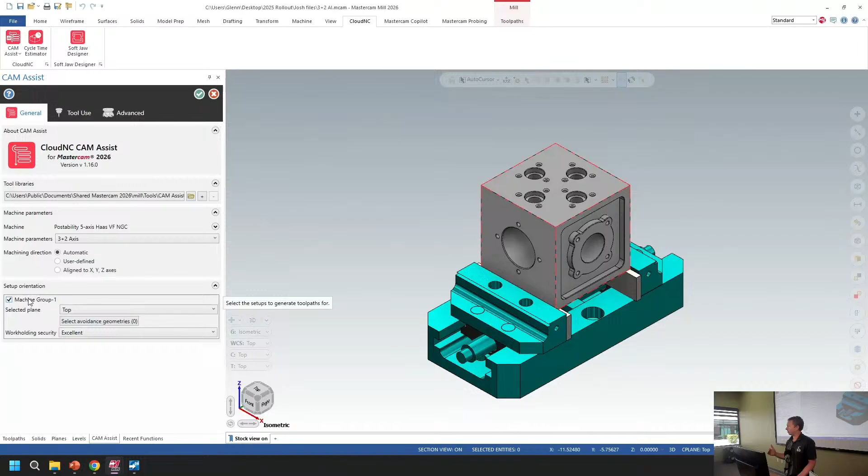And then we have a machine group. This is our machine group 1. If you had a second op machine group, you would have a second op, and that would be set in your toolpath manager initially under the toolpaths. You would select another machine and have a second machine group.

So coming over to tool use here, you can see it gives us just a summary, a bit more tool information. There's 263 tools in their default, similar to Mastercam's default tool library, like 446 or whatever it is, that they have in their mill library. So kind of a similar concept.

They have their own generic libraries with speeds and feeds, and then you can select a material here. So we could go a different materials here for speeds and feeds.

And then if you jump down to the cutting parameters, this is basically like if you have your own custom library that you're using and maybe it doesn't have all the information, CAM Assist will try to generate some of that information, or you can say just use the cutting parameters that CAM Assist recommends. So you have those different options there.

And then you could go through and remove certain tools or uncheck them or use certain tools. So I'm going to leave them all selected here, but you have a lot of control that way as well.

Sliding over to the advanced tab, you have the operations that you want to machine. So do we want to do facing? You could check that or uncheck it. You have roughing, etc. down the list. I'm going to leave all these here.

Something to mention - CAM Assist is constantly coming out with updates, usually bi-monthly. So when I load CAM Assist every 2 weeks, usually there's a new download, an update, something. For example, this basic tapping didn't exist, I'm going to say 6 months ago maybe. I can't remember exactly when, but it came out recently. For a while, they just had rectangular stock, and now there's adding cylindrical and different things. So they're constantly improving things every month, every couple weeks.

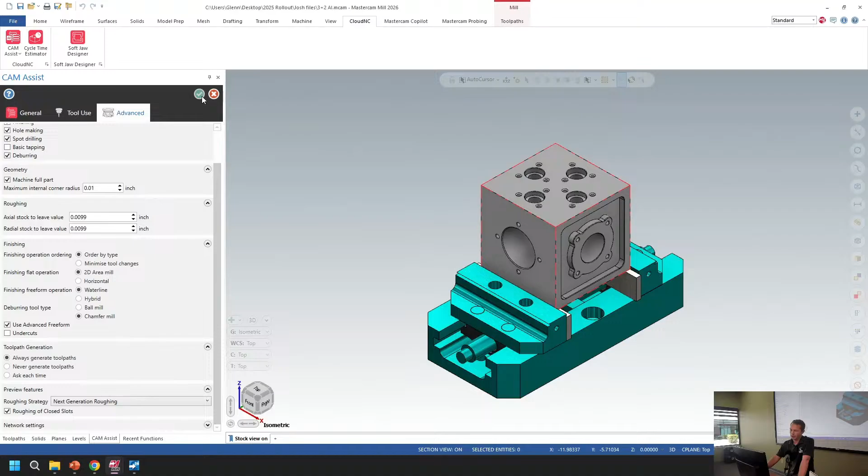Right now it's taking the data and sending it off to CAM-Assist's AI model, if you would, and analyzing the entire part, okay? So it's analyzing it and saying, how do we best approach this? And as you all are very well aware, there's an infinite amount of options when you're programming, scenarios that you run into, right? Complex things. So it has a lot to go over there and consider, right?

So we'll see how fast this computer is, right? But you can see here on the left, it's populating the toolpaths, stock models, and toolpath groups, right? So it's really cool in that if you told me, hey, go sit down and program this right now, it's going to take me a lot of clicking, right? A lot of time, a lot of making toolpath groups, stock models, right? It lays it out real clean. So right now, I've saved a lot of time.

And then it gives us a summary right here of, you got this many surfaces and this many finishing operations and different things, right? So I'm going to hit OK. And then it's going to say, do you want to see this cycle time estimate? I'm going to say no for now, for time's sake.

And now it's regenerating the toolpaths in Mastercam. Okay, so now it's completely done with the cloud side of things. It's completely regenerating in Mastercam, and I can edit any toolpath in there. Okay, so the speed of this is based off your system now, right? How fast can it regenerate in Mastercam?

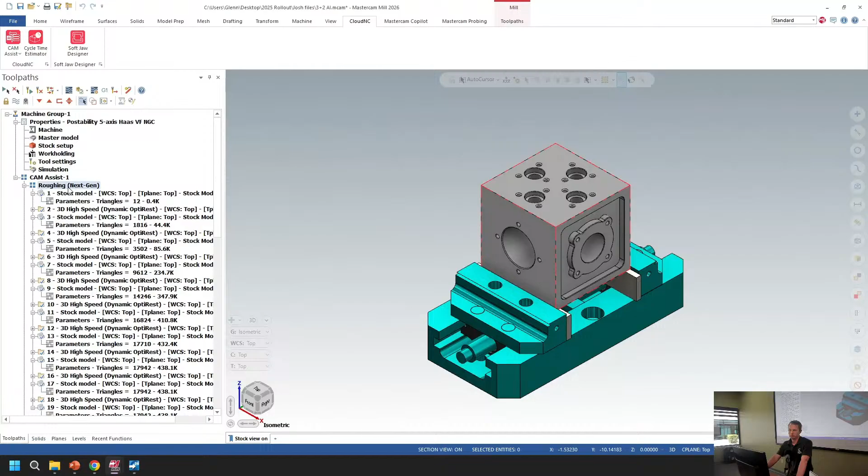So as you can see here, it's done, right? It's completely generated all the toolpaths. I can see my stock models here, right? It lays it out very nicely for roughing different things.

I could verify this, right? I'm going to show this in machine simulation if I can here. We'll find out if it works. If I go to machine here, click on the machine simulation icon...

And let's go ahead and select elements. We'll grab our part model there, and we'll use our Mastercam fixture and our Mastercam stock, and I will use the external post, and we will, hopefully we have everything selected, simulate.

So hopefully we will be able to see this in machine simulation. And remember we selected 3 plus 2, right? So it's going to have, we'll be on a trunnion here. Take a look. So right click, we're going to fit.

I need the Copilot for that, the fit there. And we'll turn off the housing here. And let's check our speed and run this a little bit so you can see.

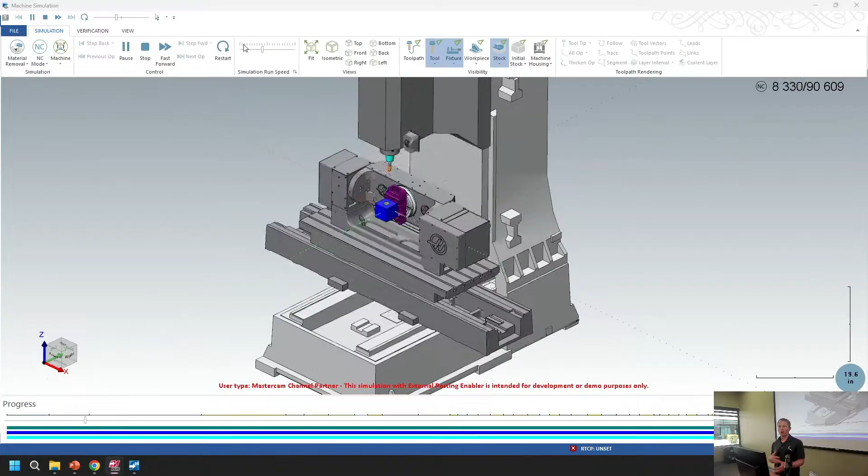It's going to come in here and do the first operation. I'll kind of run through it. But how easy was that, right? Keep in mind there's some parts that it's still getting better at surfacing, some things it's still improving on. But if you want to race me programming this part, go for it, I'll bet you lunch over it.

So anyways, I'll fast forward this here to the end. But I'll show you the part, and you saw it - I had no toolpaths or anything, right? And look at this cube with the holes and everything. So yeah, it's pretty cool, very, very powerful, right? All the selection, all the geometry, everything - solid models, everything. So it's really, really cool in that.

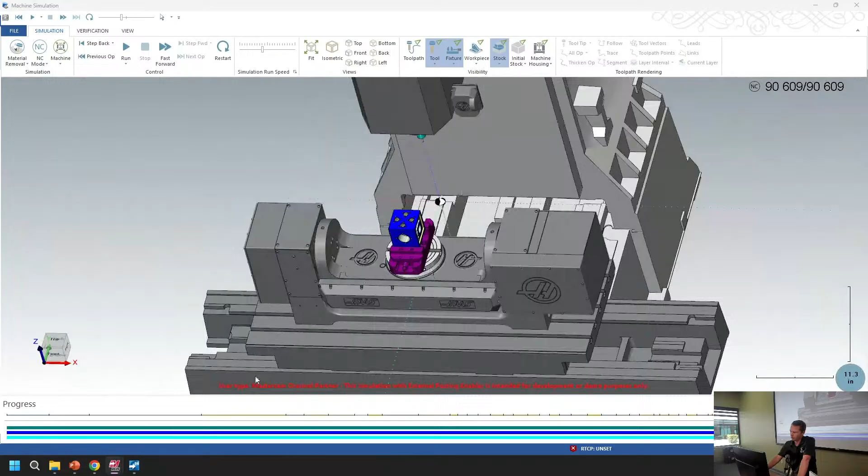I'm going to show one other thing here. Let me see if I have... In CAM Assist, they also have like a soft jaw designer here, and I'm going to try and show this. See if I get my part - this one here. So this is also another feature, and they also have a cycle time estimator.

That's cool. You can just kind of take parts, and I believe it's up to 10 parts, and you can run the solid models through it, and it kind of gives you an estimate on your time for quoting or different things. It may not be perfect, but it's a really, really neat feature, and really something you could take advantage of.

The soft jaw designer here, I'm just going to show this. It has the icon here, and we'll open this up. So I'm going to select my part here, and you can see - actually I'm going to close this really quick. You can see I just have 2 pieces of aluminum, or whatever, steel, something. They're not machined, right? So if I go back into the soft jaw designer here, I can select my part right here.

I can select - it says the 2 jaws, so I need to have this jaw and this jaw, right? And then I need a spindle direction, so a spindle is obviously going to be coming vertically here. And I need a jaw opening direction, so basically, which way are the jaws opening and closing, right? And then I got a bunch of other parameters down here, but most of these are populated because of the information I've already given it, okay?

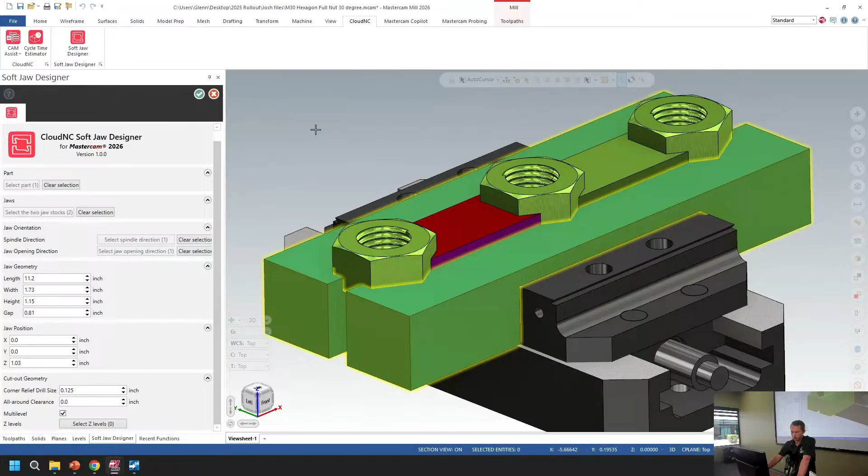So if I come down to, you have this checkbox down here, the multi-level - so if you want it to be a flat Z depth, you can just have it be a flat Z depth. In this case, you'll see hopefully here, it's actually a multi-level Z depth, right? So we'll see that in a minute, but I'll leave that checked - multi-level Z depth.

Okay, so then we'll come down to corner reliefs, right? So in this case, it's defaulting to an 1/8 inch. Maybe I'll go like .1875, right? Oops, I always forget that when I'm in the field, it changes it. And then let's hit the green check - we'll see if I forgot anything, right?

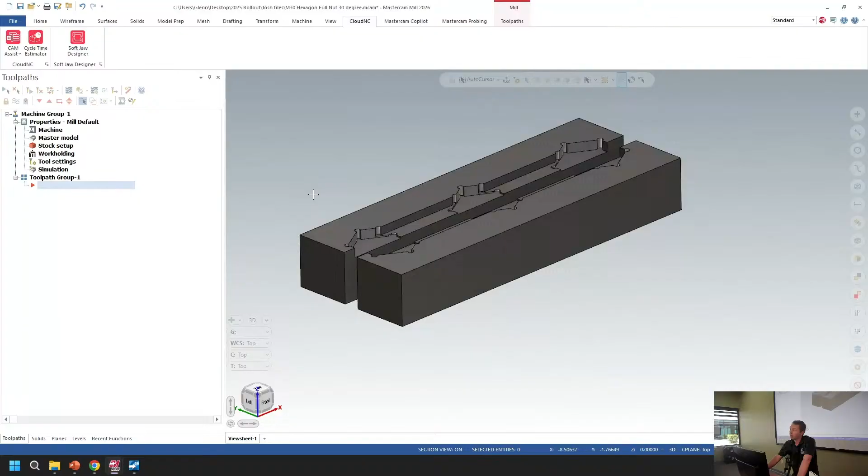But we'll give that a minute to generate, see if it can do it. When you're doing it live, maybe - you never know if you forget something, find out. But so now it's complete, right? So I'm going to click on the jaw here, click on the jaw here, hit Alt-E to hide everything, and you can see there's our multi-levels in Z, right? We have multiple Z depths. So I think that's cool, right?

You know, how many times you have to sit there and draw stuff or curves on edges and then offset it because you need, and then you got to enlarge the relief drill size or whatever, for the edges. So anyway, just some really neat things that they're coming out with. And if you guys and folks have any questions, feel free to come up to me or any of our team and ask about this.

Or, you know, any questions right now that I can cover? Yeah, for example, the other part - yeah, will it ask you if you want to use a reamer or bore it with a boring bar before you hit, you know, like the back?

Right now it doesn't ask you if you want to use a reamer, but you can go in and change the tool. You don't know what the system is going to choose, reamer or just a drill. It doesn't know yet, that's correct. Most likely it'll pick a drill.

You're gonna have all of the information picked, the top of the hole, the bottom of the hole, all of that's gonna be set. All you need to do is go back in and pick, if you're gonna bore it or ream it, pick your reamer, change your cut parameter. That's it, those are the only two.